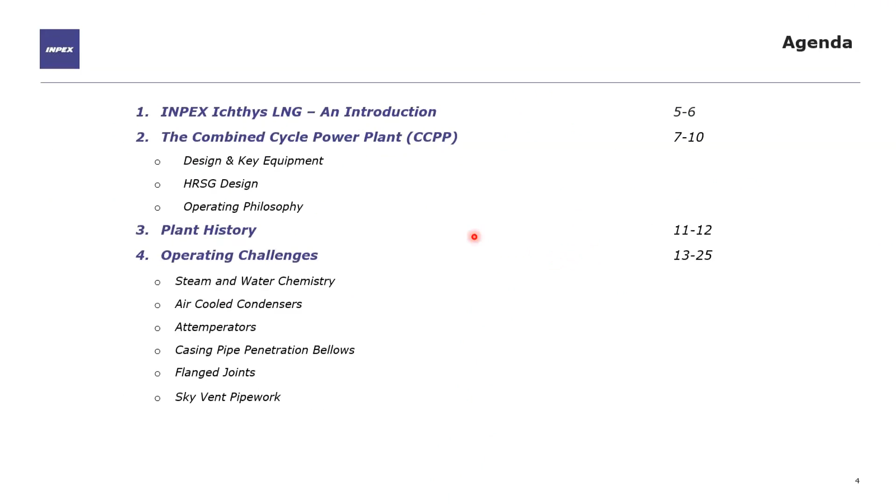Okay, so today we'll just introduce the Ichthys project to the AHUG audience, looking at the onshore combined cycle power plant, or CCPP. We'll go through its design and key equipment, the HRSG design, operating philosophy, some plant history, which neatly takes us into discussion of some of the challenges we have or are still facing today. In a nutshell, the Ichthys project is INPEX's first owner-operated project with a whole bunch of subsea infrastructure — two massive offshore facilities and an 890-kilometer subsea pipeline to the LNG plant near Darwin.

This is an aerial photo of what most of the onshore LNG plant looks like. It is what's called a 2-train LNG facility, so 2 processing units that take feed gas and turn it into products.

Headline numbers, it can produce a lot of LNG, a lot of LPG, and a heavier hydrocarbon liquid called condensate. Despite all the challenges we've had since FID was reached in 2012, since starting up production, we have

been producing cargoes at a rate that puts us in the upper echelon of similarly sized plants globally. The power station shown in this yellow box is one of many key utilities on the plant. Within Australia, this LNG plant is the only one I know of that has a combined cycle power plant rather than a bank of just gas turbines. From a design point of view, that was probably to achieve more energy and emissions efficient power production. And originally there was an intent to use excess isopentane coming in from offshore.

This gives you a bird's eye view of some of the key equipment. So there are 5 40-megawatt gas turbines, each with an HRSG, a set of common piping headers of steam, condensate, and water, which I'm told is a very rare design these days, but there are reasons why we have this setup, which we'll get to shortly.

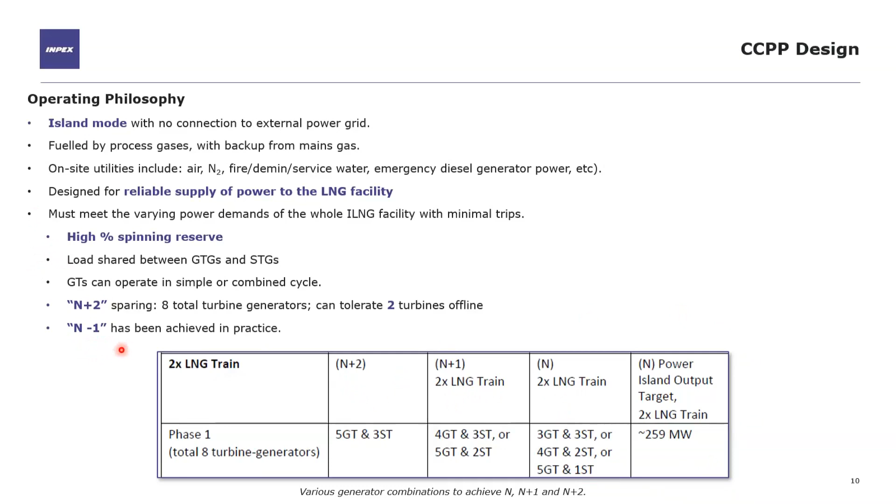Going into some plant history, without going into too much sordid detail, there were some very well publicized contractual issues during construction. This shows up to a degree in the gaps between the first and the last gas turbines to be started up, and the gap between the last gas turbine and the first steam generators.

If you're very eagle-eyed, you might notice that the date of the first HRSG startup is almost a year after we started producing our first few LNG cargoes. But anyway, they're all online now and they've been operating for about 2.5 years.

Prior to getting to this point, the operations team that I'm in did, well before commissioning, an RBI assessment across all facilities, including the power plant.

One of the RBI team members was a very good power plant chemist who did a pre-commissioning review of our steam chemistry, looking at the analyzers, listing out all the things we should be doing. That work fed into a very EPRI-centric chemical treatment guideline, which was reviewed by everyone and issued for use. Then, prior to introducing steam to our turbines, we had an independent site chemist come to our site, give his opinion and make some very important recommendations.

To this day, we are still refining our RBI programs using expert help, as well as live data from parts of the plant to understand how our plant runs. There is significant effort in trying to improve reliability of the plant, so there's a formal reliability improvement program in place across different disciplines and themes.

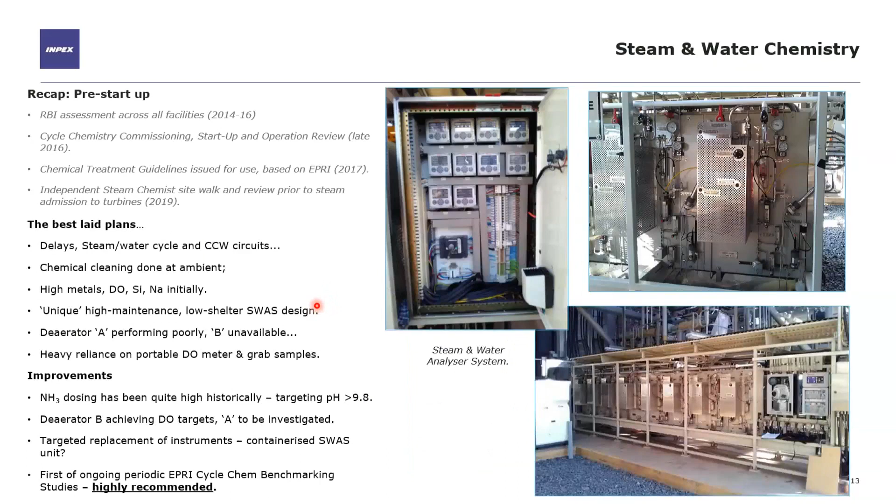A decision we're grappling with now is to replace our low shelter, high maintenance SWAS with a proper SWAS containerized unit. And from what I'm hearing, that's very much a go. It'll just take some time.

We've recently had the first of what will hopefully be a periodic EPRI cycle chemistry benchmarking study. If your plant isn't doing this already, I highly recommend it. In our first attempt, we scored an average ranking of 18, which isn't too bad, but we know we need to do better. We know what we need to do better, and it starts with the SWAS. We've been given a fairly clear roadmap. We just need to do it.

On the inspection side, fortunately, from what we've seen so far on the HRSG, we haven't seen any direct evidence, either through UT or visual, of FAC on any components yet. But on the solar air-cooled condenser we have looked at, we are definitely seeing indications of, well, if it's FAC or erosion, one of the two. Penetrations are looking great, and offline there's a lot of residual water left behind and a lot of flash rusting.

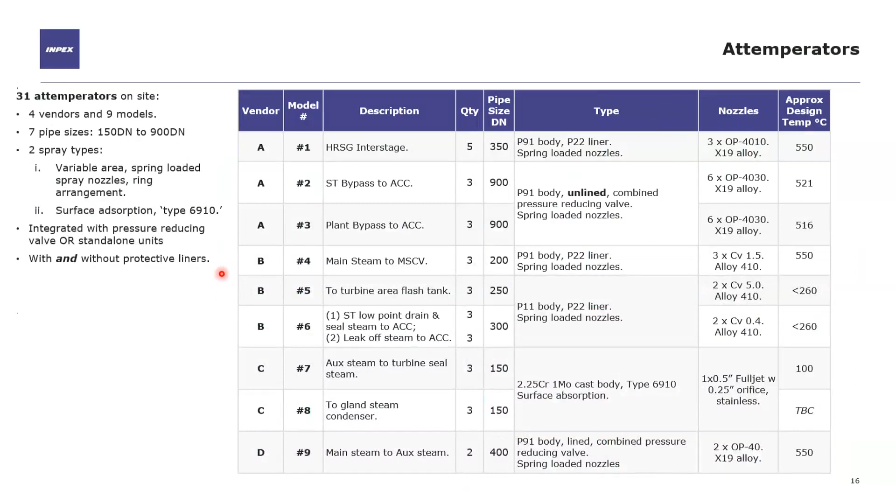Turning now to our attemperators, I won't read this table out, but what I will say is that we have a lot of attemperators on our site, 31 units all up, across 4 different vendors, 9 different models. The pipe sizes range from 6-inch to 36-inch. They are primarily the spring-loaded variable area type, but we have a half dozen of these surface absorption desuperheaters, which I'm not sure are commonly used in the power sector, so I'd appreciate some comment on that and on the sheer number of different types and makes and models we have.

Many of them are standalone, but many are integrated with pressure reducing valves. Many are lined, but a good half dozen are not lined. The spec sheet clearly says a liner is not required, though if you look at the design conditions, it's questionable as to the logic they may have used.

This shows schematically where all the attemperators are. You can see that single interstage attemperator on the HRSGs, but by and far, the vast majority are concentrated in the steam turbine and ACC area.

We've been confronted by finding at least one cracked attemperator nozzle in all 5 of our HRSGs during their first inspections, which was around 15 to 18 months from startup. I know there's a lot of work that goes into attemperators, but is this normal? Should we expect a minimum of 2 years from a good attemperator, or 4 years, or perhaps more?

Typically, the external cracking shows up through mag particle as cracking through-wall at the flats. Though once or twice we occasionally see these heavily scaled and dirty-looking nozzles, and if you look on the inside of it, you have this metallic gray appearance, which to us is very indicative that this hasn't been flowing water, compared with the vast majority of nozzles which have that classic AVT-O red color. When we first asked the vendor about it, to them this was a novel failure mechanism that they'd never seen before, though fortunately we hadn't seen any pipe or liner damage as of yet.

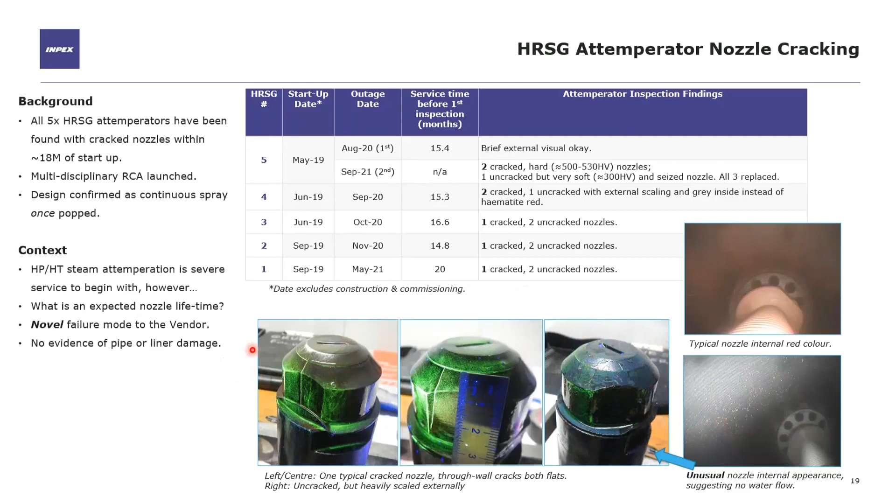Internally, this is what many of the cracked nozzles look like. It appears that cracking has started at one or more of the ligaments. The stresses have then allowed a crack to initiate and propagate in the next ligament, and before you know it, you're at the wall and making your way through the wall.

We've now had 2 different metallurgists section and mount cracked nozzles, and they both agree that the cracking morphology takes the form of stress corrosion cracking rather than, say, a fatigue mechanism. There's a lot more to an attemperator than just metallurgy, and we're working on the process side as well, but our findings we thought were pretty compelling.

So the vendor has specified an 11% chromium martensitic steel, in some ways not too dissimilar from P91, with a surface hardening treatment to improve the galling wear resistance. And they targeted a 45 to 48 Rockwell C range, which is about 450 to 480 Vickers.

That might have been reasonable for those 2 characteristics. However, it is quite well known among metallurgists and in some fairly important books that these sorts of materials, at these sorts of hardnesses, are acutely susceptible to stress corrosion cracking, and theoretically in moist air.

We've gone hardness tested on the bench and portable hardness tested, probably 15 nozzles now, some brand new, some cracked, some used but not cracked. Many of them are out of spec, up to 600 Vickers, with many above 500 Vickers. There was that one very soft nozzle, that's a special case.

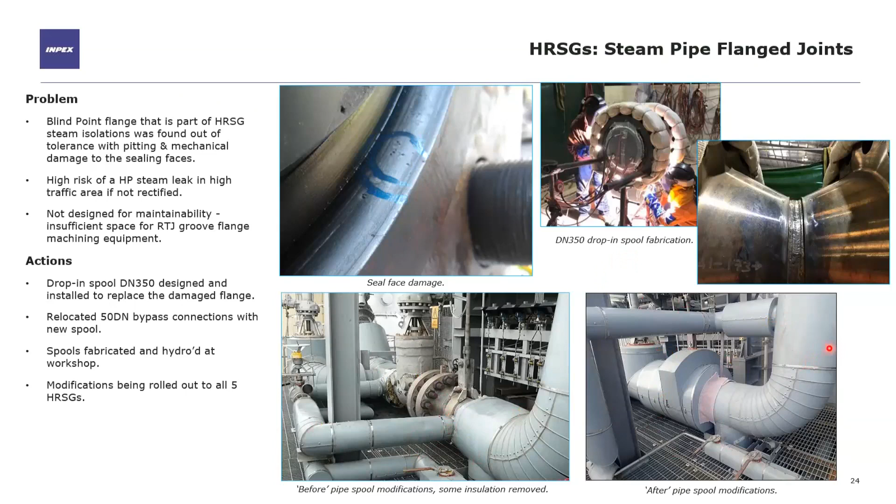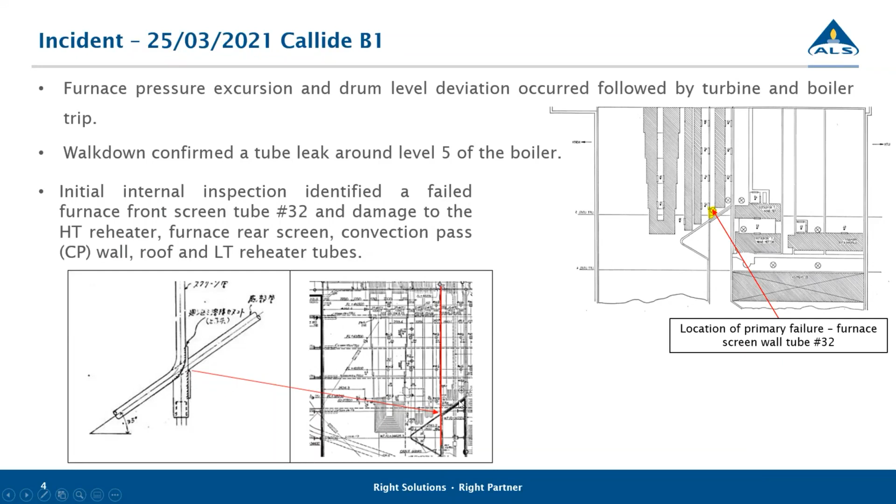So just a history of similar incidents. A complete tube failure at the gusset connection occurred on B1 in 2015. If you look at the failure this year, again we had a tube failure on B1 that had a complete failure, so the complete rupture of the tube. And also on B1 in 2020, we had a crack with a leak before rupture.

So I'm first going to talk about just the metallurgical analysis that was done. The tests performed were the typical process we normally follow: visual examination, hardness testing, fractography examination looking at the fracture surfaces, chemical analysis, and metallographic analysis.

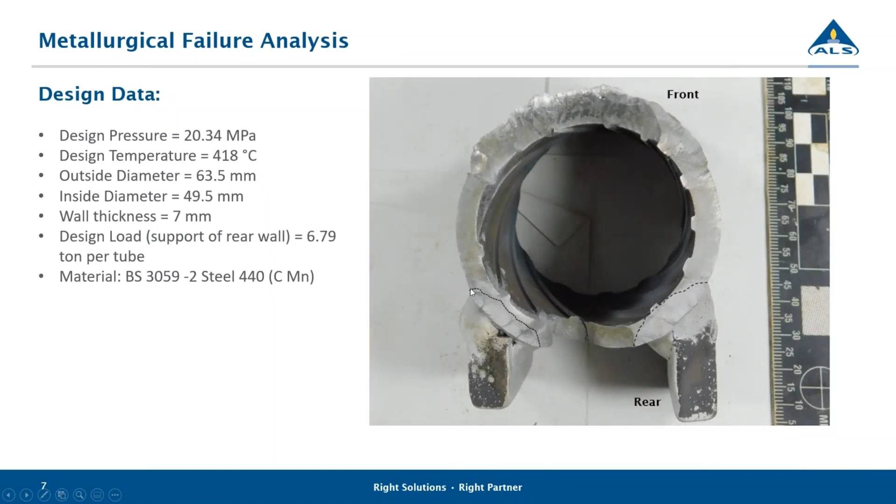You can see here is the failed surface of the tube, just above the two brackets. You'll see this is the first area which cracked from the toe of that bracket into the tube, nearly through wall, and then we also had the other side which didn't grow so deep, but before it leaked, the rest of the section failed, and it's quite a large section that has failed.

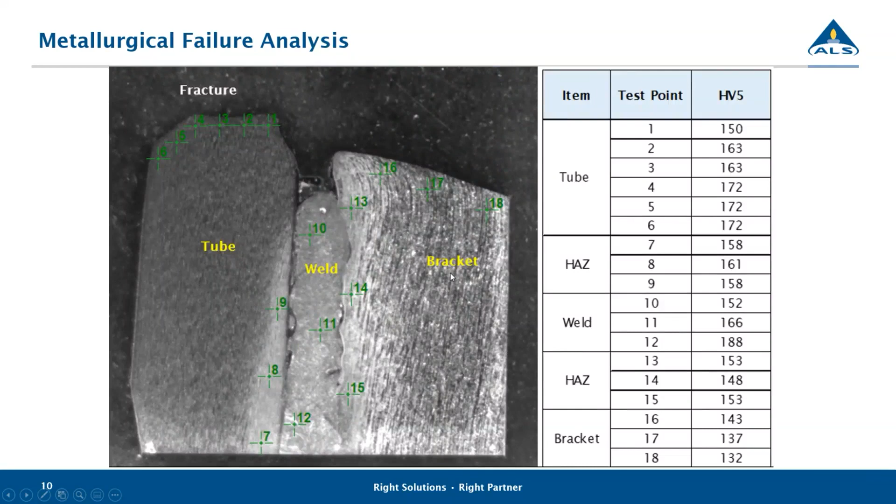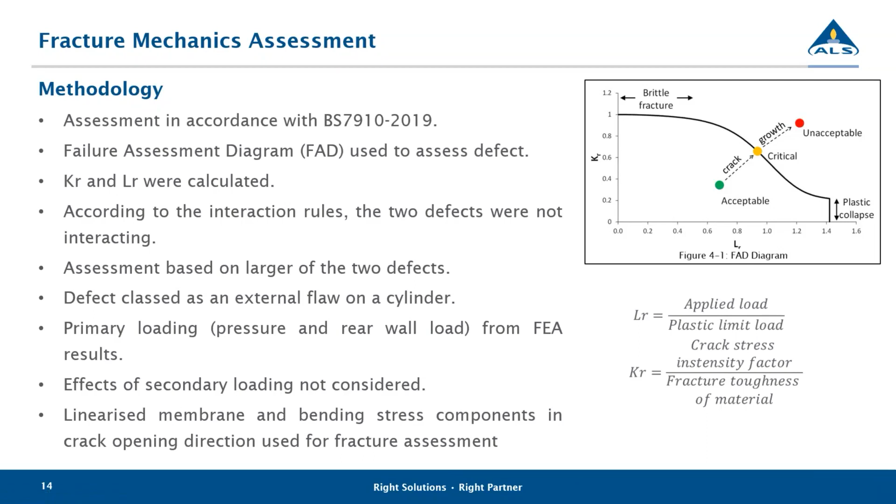So just the conclusion from the fracture mechanics assessment is that the loading with the defects present is sufficient to cause plastic collapse. If you look at the toughness ratio versus the plastic collapse ratio, allowable versus actual, you'll see that we've got a plastic collapse ratio of 1.32, which tells us that for the defect we've assessed, plastic collapse is plausible. So that gave us confidence that there's not something else that caused an overload, but that with the defects there, and because the tube is highly loaded, those defects could be sufficient to rupture that tube completely.

We also had a look at vortex shedding frequency. So we looked at the length of that sling tube versus the design gas flow across that tube and calculated the vortex shedding frequency. It's around 30 hertz for a Strouhal number of 0.2. Obviously there is a range there, so we did calculate a range, but for 0.2 it's 30 hertz. Then CS Energy also, during outages, tests their tubes for natural frequency to check if the tubes are actually carrying load. They put an accelerometer on there and then do a bump test to see what the frequency is. The fundamental frequencies they've measured on site are between 32 and 41 hertz. So we can see that it's pretty close.

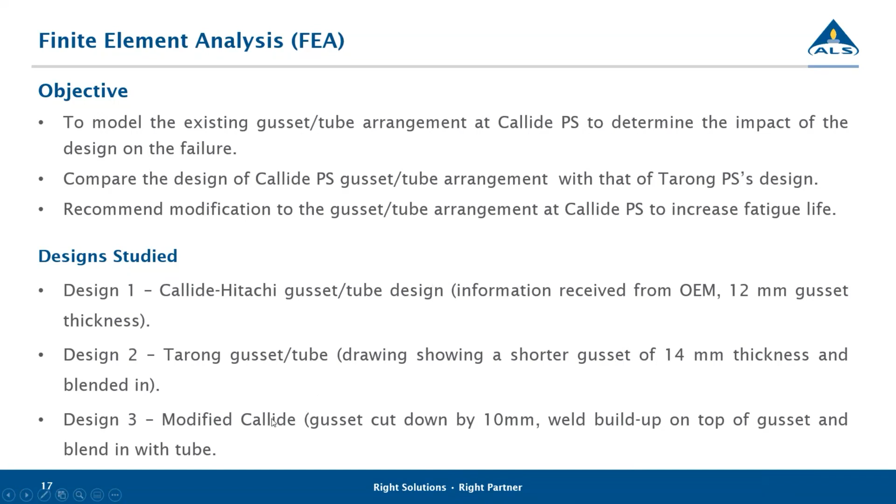So there's 3 designs that we looked at. The original design, which is a 12mm gusset with just welds on the side, no weld on the top. Then we looked at Tarong - it had a shorter gusset with a 14mm thickness, and it was blended in. And then we looked at a modified design to see what we can do with the existing geometry on site, to see if we can improve that situation.

Tarong design is slightly different, which is strange - it's an older boiler, so you would have expected the design would be improved from Tarong to Callide, but in Tarong's case, the bracket stopped almost on the bend, and at the top of the bracket they actually filled in that little abrupt change, to blend that weld in. I've been on site looking at that specific geometry, and it looks pretty blended in there - you almost can't see a notch. So that's a big difference in the finish.

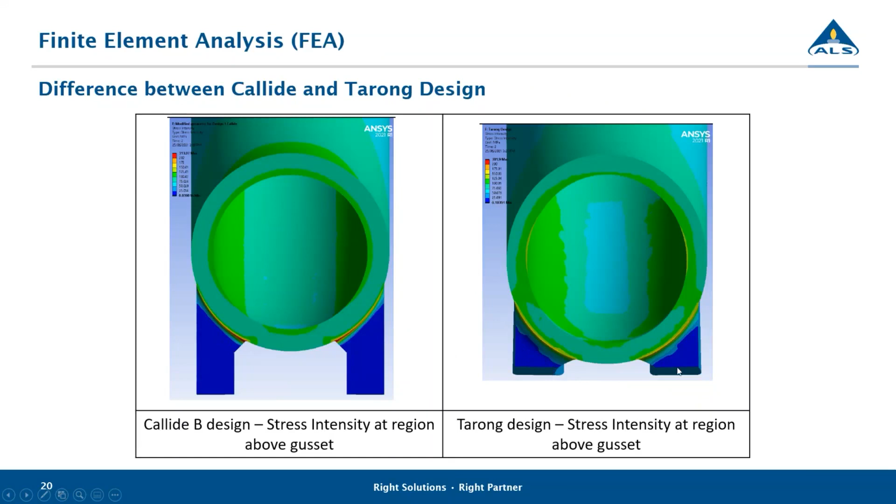If you look at the stress results, we got the same response where you saw that fatigue crack develop and moving in - we got that same response just above the toe above the bracket, not on the bracket, but just above it, and similarly for the Tarong side as well. So you can see the difference in thickness, as well as the difference in stress response.

But the big difference was in the peak stresses - quite significantly different because that weld is blended in, and this one has got that abrupt stop. So we basically cut back that bracket and put a weld on top of it and blended it out to drop the peak stress. That's pretty much what we could do with the geometry on the plant.

So from the FEA side, the stress is close to the maximum allowable, even for a defect-free structure. That means when they designed the screen tube, just from a pressure perspective even - we did the code calcs as well - they had that very, very highly loaded. So that's not even considering the bracket geometry.

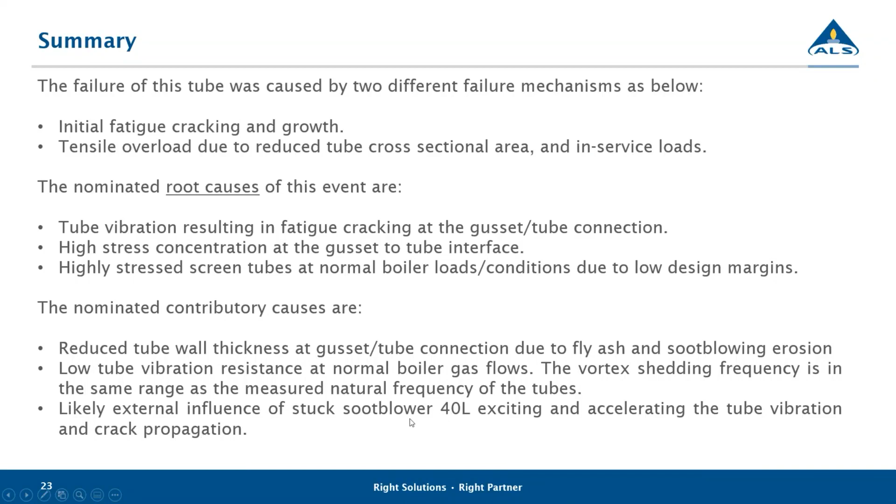So that's in summary. It's an interesting one. If there's any questions, please feel free to ask.

Jerry, very nice. Barry, we've got a few minutes for questions. Yeah, there's one here from Gree. I'll read it out, it's just a short one.

Jerry, he says he might have missed it, but what were the materials for the gusset and the tube made of, please? It was steel 440, so it's a carbon manganese steel, just normal water wall material.

That's it. Well, yeah, okay. And I don't see another one. Let's see if there's another one here. No, the other ones are for Ben, so we'll have a question.

So Jerry, there wasn't any detailed metallography, but maybe you can tell us. It would be a little surprising if there wasn't any cracking from the inside with such levels of stress, or something like corrosion fatigue. I couldn't see anything.

No, all of the cracking propagated externally, from the toe of the welds. All of the secondary cracking — that whole area above that weld was full of secondary micro cracks. So it was basically fatigue at that peak stress location. The rest, there was no evidence of any cracking from the inside.

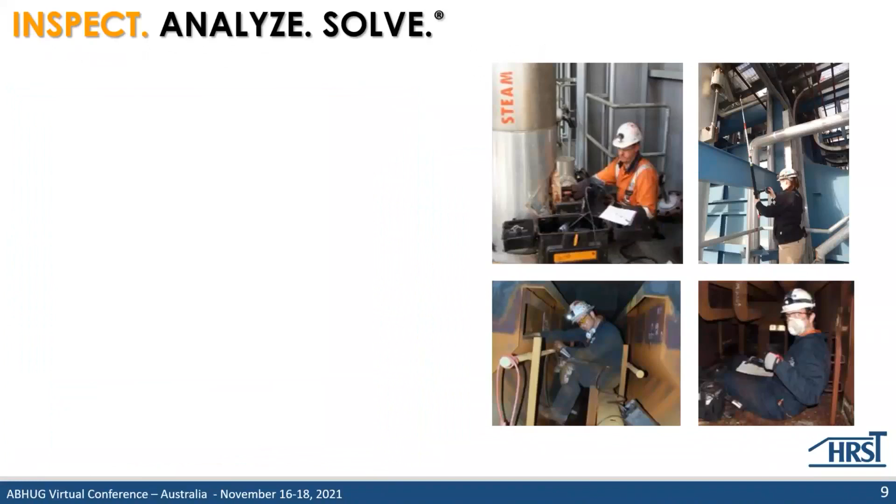So back to what we do. We do a lot of inspect, analyze, and solve. We're in over 280 HRSGs a year, so we see a lot of things that work and a lot of things that don't work. We try to provide good recommendations to clients and share those lessons learned. From that, we use photographs, drawings, dimensions, and failure history, along with knowledge of what worked at other plants, to help make recommendations and improvements. I need to give credit to ALS for this image in the bottom right-hand corner. They help us a lot with drum cracking analysis work, so we partner on that a lot. That image is from one of their reports to our client.

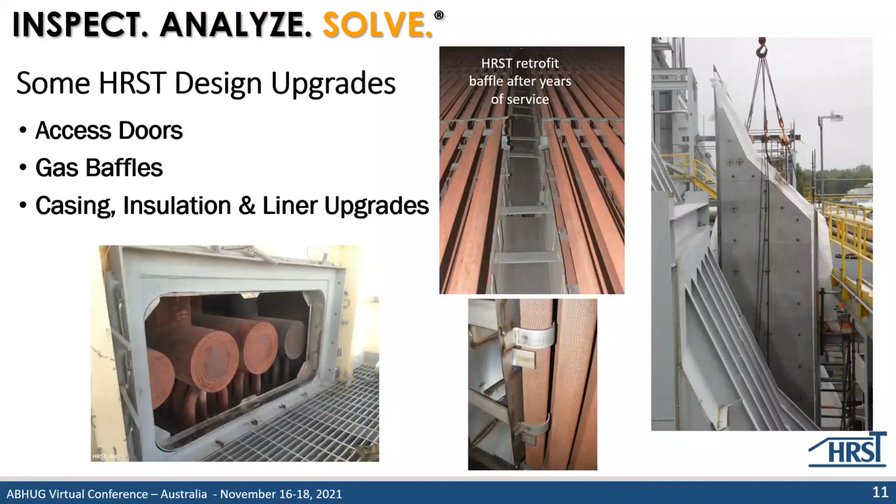We do a lot of solutions that involve hardware. We sell a lot of access doors. Sometimes those doors are not to enter, just to reach through to look at fragile areas like tube-to-header joints on reheaters or HP superheaters. We've sold some doors in Australia just to get tube samples from the HP evaporator out, because the row of tubes we want to sample is not accessible due to a superheater right in front of it. We also do a lot of gas baffle work, and sometimes we replace the entire walls of inlet ducts, or all the liners and insulation in an inlet duct or firing duct. Those are great projects for us.

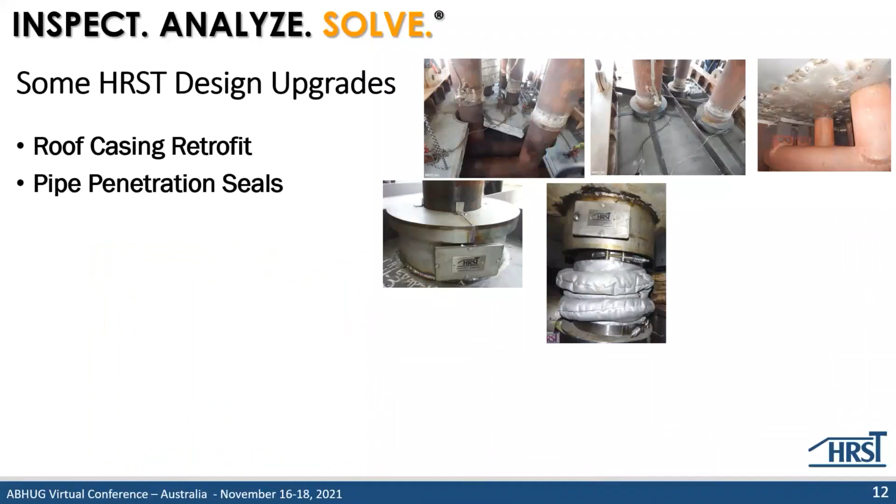One more slide after this. We do a lot of roof casing retrofits. As these HRSGs get older, Module 1 and Module 2 roof casings deteriorate due to weather, heat, and failing pipe penetration seals. Those are pretty complicated projects - we call them puzzle pieces that we come in with to try to retrofit effectively. We do a lot of pipe penetration seal work, removing the old seal and putting on something better that's hopefully more durable. Lately we're doing a lot of drum door manway upgrades, making them safer and more reliable using Belleville washers and different hardware that's easier to open and close, because we know how important a good seal is on a steam drum and how leaking during startup can cause problems.

Thank you, Lester. Lester, being in Florida, trying to surf in Florida is like trying to alpine ski in Kansas, so you might have been in the wrong place - it might not be you, it might be the location. No, I can't handle anything except Florida, I need those tiny waves, I'm too old and too fragile. I was stiff, stiff bad here yesterday. Did that on Sunday. Oh good. Well, thank you, thank you much.

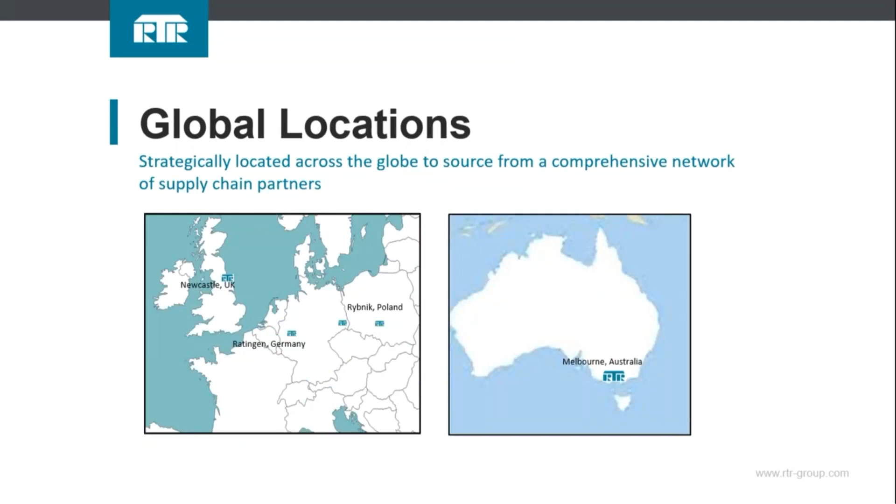Our global locations here, you can see there - Ratingen in Germany is our head office. I represent the Newcastle office in the UK. There's an office in Poland, a strategic office in Rybnik. Obviously, the Melbourne office here in Australia is where I'm located. We're strategically located across Europe to source from a comprehensive supply chain, some of which our suppliers we've been working with for more than 20 years - forge masters, pipe mills, stockists, fabricators, everything.

The product range is very varied for the various applications in power gen. We offer main steam, hot reheat, IP, HP, loop pipe work in CMV, 2.25% chrome, 9% chrome with GT26 turbines and CCGTs. That's pipe work for partial refits to wholesale steam line replacements.

We also offer the associated pressure fittings and elbows and pipe hangers and supports for these contracts. Fully fabricated water wall, induction bending as a major part of that and what we do as well. And as we're developing, we're doing an awful lot more work in explosive, roll bonded, weld overlay clad products. All of this is supplied in accordance with bespoke and technical requirements in accordance with clients' needs.

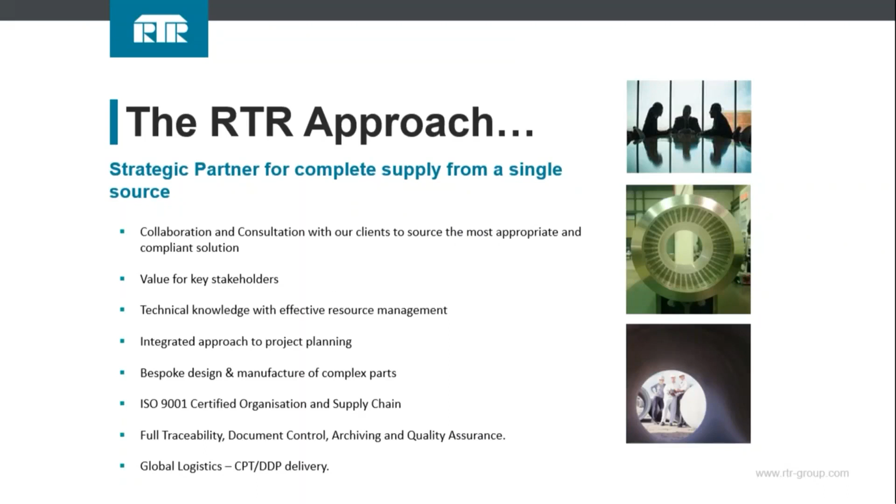The benefits in terms of optimum longevity, the reduction of welding, not to mention the fact that you're saving time on installation as well, and the reduction of continued observation of welds that no longer exist. The initial upfront cost for a forging can be higher, but the long-term cost of running as part of the plant life can be a significant saving.

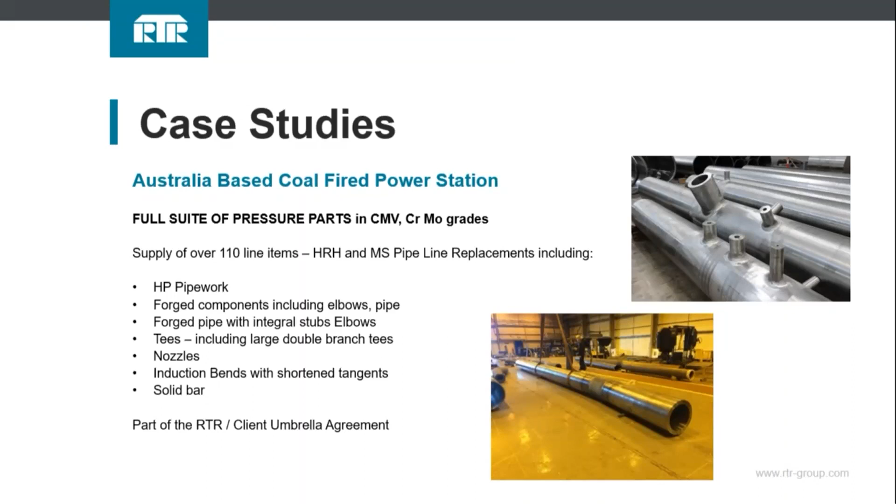This is one of the largest forgings that we've produced in our company. You can see this double branched 5-ton reheater strainer body, the machining involved to produce the finished part, produced with an integral reducer, eliminating the weld setup that was previously in place. This is all manufactured to extremely tight tolerances, plus or minus half a mil to manage weight. There's also been thousands of dollars spent on the technology to machine the internal radii on products like this, smooth and completely contoured to eliminate those stress points of sharp edges that you see.

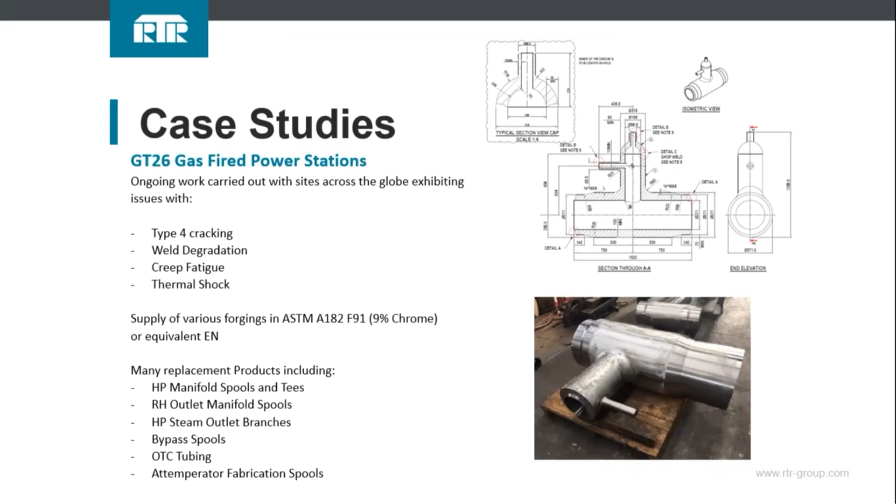As things develop, we're seeing an awful lot of work in GT26 turbines, particularly in the UK, where there's been a lot of issues with type 4 cracking, weld degradation, creep fatigue and thermal shock. So we've done an awful lot of work in 9% chrome, supplying, for example, this integral forged T for manifold spools, reheat outlet manifolds, done an awful lot of bypass work, OTC tubing and attemperator fabrications. We would encourage anyone with similar setups and the GT26s to come forward and have a chat with RTR, as we may have been producing products that meet your requirements.

Thank you. You had it, then it went away. Okay, can you hear me now? Yeah, we hear you, your full screen went away though. Yeah, I'll get it back here. Okay, just takes a minute. It's got a long way to go. Yeah, I guess so. Well, hello everybody, Kirk Buecher here from Mettler Toledo. Hopefully I'll be full screen here in just a second.

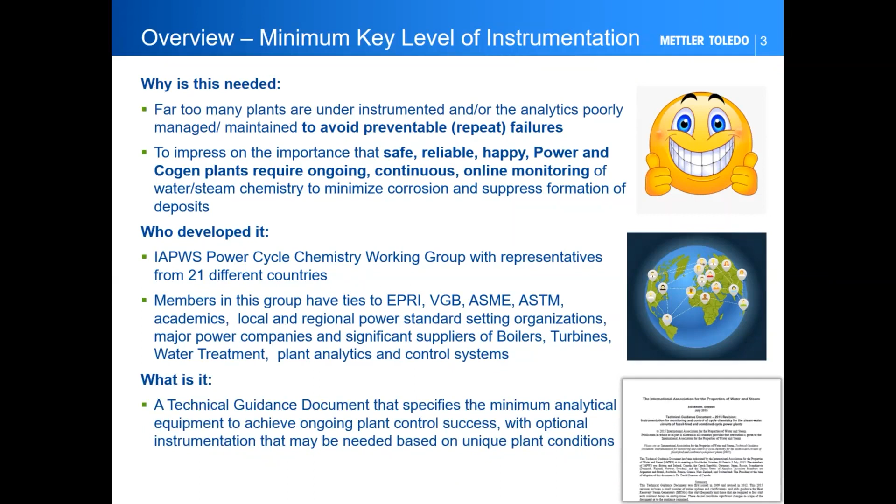That group developed and continues to develop and upgrade this technical guidance document that really lays out and specifies the minimum analytical equipment required for these happy, healthy plants. These standards, these documents, these recommendations were really developed with the following points in mind: you should have at least enough instrumentation that you can pinpoint the parameter, the driver for each failure mechanism that can occur in that plant. But you can't be just single threaded. There needs to be some redundancy there, and it needs to provide more sensitivity, more of a holistic view.

So one instrument should be able to represent a problem, a failure in the cycle if one goes down. If a unit goes down, or something's out of service, or needs to be calibrated, or an analyzer's out of reagents, there has to be enough redundancy built in that the operator isn't questioning the accuracy of the analytics itself. They've got to believe it's a water problem. So there's got to be enough redundancy so the first response isn't, oh, there must be a problem with that sensor, transmitter, or analyzer. We've got to get beyond that, and that's why we need the redundancy.

That also relates to this idea of trust. There's got to be trust in the results, the feedback from the analytics. This touches on concepts you've probably heard: smart analyzers, smart alarms, verified alarms. Those are talking points around the analytics and how they can raise the level of trust. And those analytics, especially these critical few, need to be correctly alarmed, audibly alarmed, and they need to trigger a response in the control room, through the DCS and PLC.

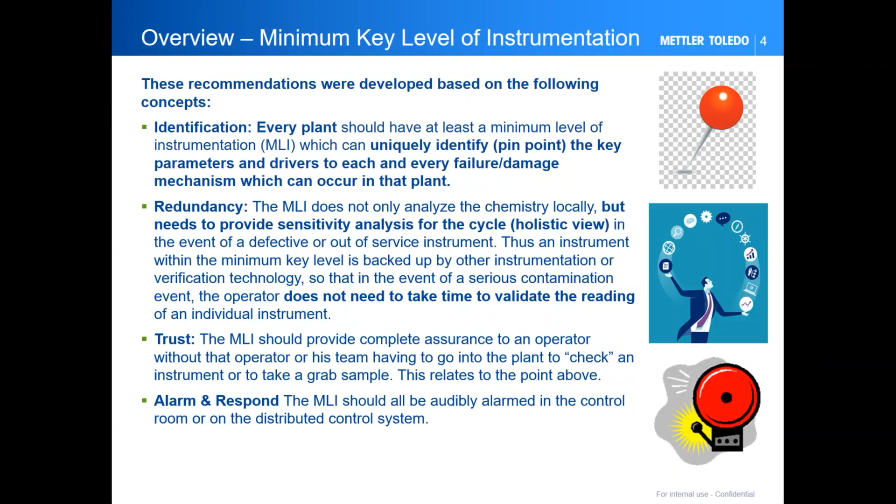I probably, pre-COVID, visited somewhere between 40 and 50 power plants a year all over the world, and I'm still surprised by how many sensors, transmitters, and analyzers are just standalone. They're not connected to anything. So if you're not standing next to the transmitter or analyzer when the alarm goes off, you could go hours before anybody caught the problem.

So, a quick overview of the key instruments. Again, these key instruments are defined by this document. Just a basic overview on specific or direct conductivity.

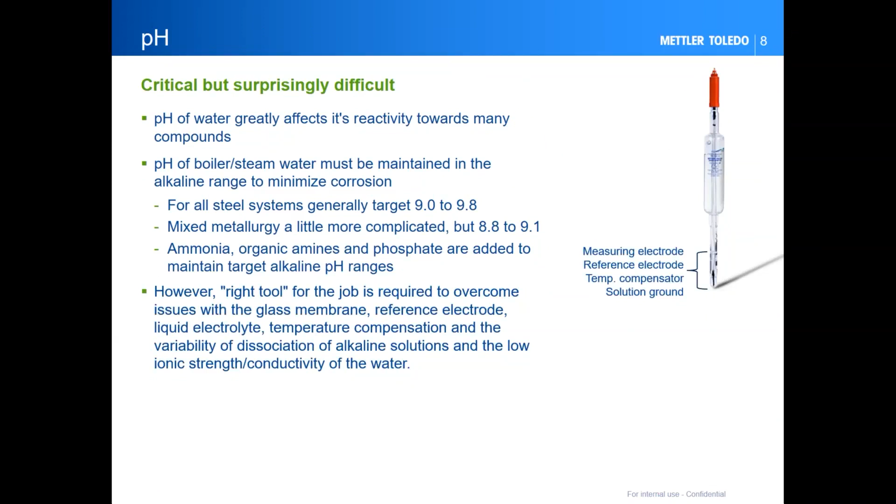pH, as most everyone who has dealt with it in pure water knows, is a critical measurement, but surprisingly difficult. Measuring pH in low conductivity, very pure water is really problematic. You have to use the right pH electrode for the job - it's got to be designed for pure water, low conductivity measurements. You should probably avoid any measurement system that relies on flow bowls, because unless you're really vigilant about keeping them clean, you pick up particulates and corrosion particles, which interfere with the accuracy of this very sensitive measurement. You've got to stay on top of calibration, and wherever possible, back up that measurement with calculated or derived pH. It's a critical measurement - much like the old saying, measure twice, cut once, it applies to pH. Measure pH with two different technologies simultaneously, and monitor the relationship between those two measurements.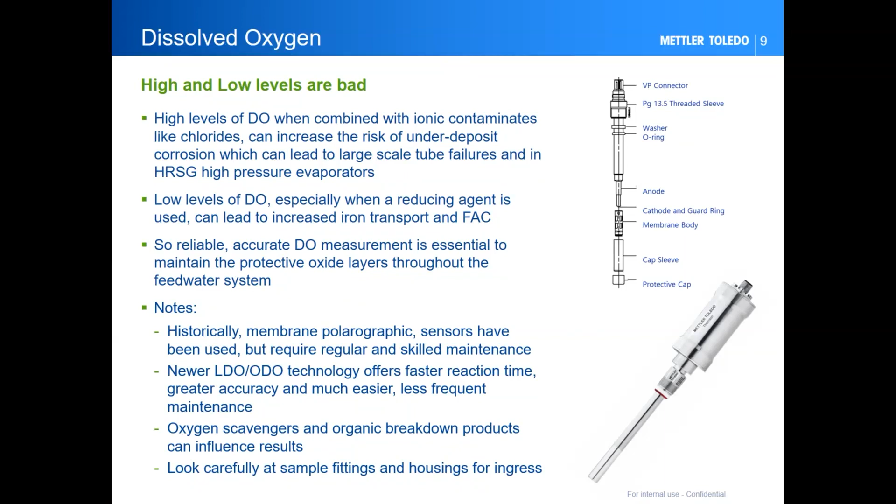Dissolved oxygen, as you probably all know, too high is bad, too low is bad. Especially low is risky when you're using a reducing agent. There is some new technology on the market, this optical-based technology - some vendors call it LDO, we call it ODO - that eliminates the traditional polarographic membrane, which reduces a lot of maintenance, reduces the frequency of calibration, and gives you a faster, more accurate measurement. It's really kind of the trend in the industry where a lot of people are going nowadays.

Sodium is a critical measurement, particularly for any plant that is seawater cooled or has a high level of sodium in their raw water. The fundamentals here are you're using DIPA to prevent interference with that measurement. You really would want to choose an analyzer that has automatic calibration as opposed to those with manual calibration.

When it comes to phosphate, still a lot of plants are using phosphate. The recommendation is it should be trisodium phosphate at a 3-to-1 molar ratio to really avoid potential damage being caused by the phosphate dosing, and to avoid chasing phosphate hideout problems of overdosing and underdosing and swinging back and forth.

Historically, some older analyzers really struggled. Online analyzers for phosphate honestly weren't that good. They weren't reliable, had high levels of reagent consumption, high maintenance requirements. A lot of plants tried them, got frustrated, and moved away from them. But I'd encourage you to take a look at some of the newer technology that's out there. It's really much better than it's been in the past, and it avoids the infrequent measurement that typically goes along with grab sampling.

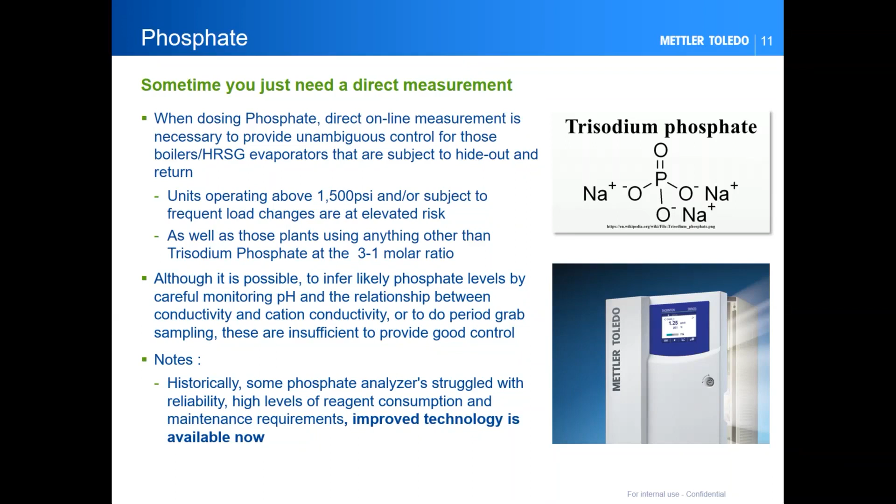ORP is an optional measurement, but really important. It's a key measurement if you have any copper alloys in your systems. There are standalone ORP sensors, and there are ORP sensors integrated with a pH electrode. Calibration is really important with ORP sensors, but unless you've gotten some training on it or built up some experience, a lot of people calibrate ORP sensors incorrectly.

The placement of that ORP sensor is really critical when you're measuring ORP relative to the scavenger measurement. Too early or too late relative to the scavenger dosing pump is going to give you incorrect readings. You've got to do the calculations to determine that your ORP sensor's in the correct location.

So that was a quick overview of the required analytics. Now some of the recommended or optional: degas cation conductivity. It really solves for that unknown of what is the contribution to your cation conductivity based on the CO2 that's in the water. That's a particular problem for fast start plants and for cycling plants. You absolutely can start your plant faster if you have degas cation conductivity because it eliminates that unknown. It gives you the confidence that you have the proper water quality and ultimately the proper steam quality to start up your plant and make sure your steam quality is in good shape.

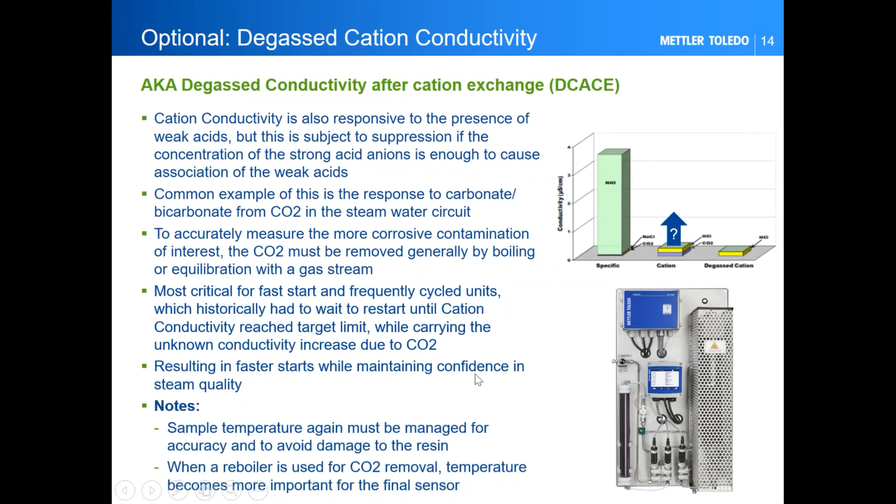The other optional measurements here are silica. Sometimes I'm really shocked that silica is optional — most plants use it, it's almost a default. It's considered optional because if your raw water has low silica level, and you have excellent and well-maintained water treatment system, you can get by with some periodic grab sampling. I personally wouldn't recommend it, but that's your choice.

Again, there have been some knocks against silica analyzers in the past because of reliability, high reagent consumption, or high operating and maintenance costs. There's really some new analytics on the market that eliminate that and could really move from optional to recommended if it's low maintenance and low cost to operate.

Total organic carbon is another recommended, optional, not required measurement. It's really critical for cogeneration plants, pulp and paper plants, refineries, chemical plants — wherever you have a real high risk of organic contamination coming back with the steam condensate. Highly recommended in those situations, and it can really prevent those organics from coming back and quickly wiping out the resins in your condensate polisher, or, without a condensate polisher, going into your boiler and breaking down into organic acids.

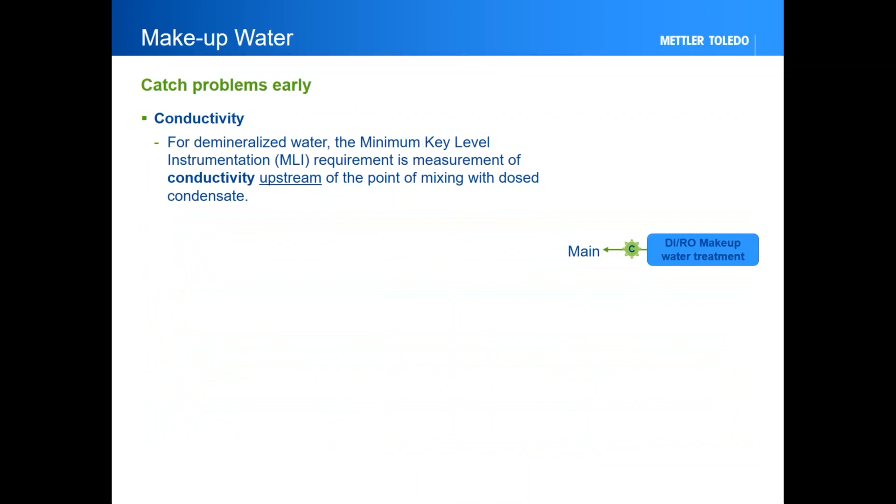So why are we measuring this? Where are we measuring it? We're going to go around the water treatment cycle, the boiler steam cycle, starting with conductivity. In the makeup water, you want to measure that as it comes out of your water treatment, upstream of where it mixes with your returning condensate. Then for cation conductivity, you want to measure that in the condensate stream, so you have good insight to the quality of the water coming into your boiler steam cycle, returning from your condensate. And if you have a problem, you know where that problem is sourced.

Again, some of the optional measurements here are silica and TOC. TOC is particularly important if your raw water comes from natural rivers, lakes, or streams that have a lot of organics in it — particularly a problem in Southeast Asia, places like India. They really struggle with building water treatment systems that can remove all those organics prior to it going into the rest of the cycle.

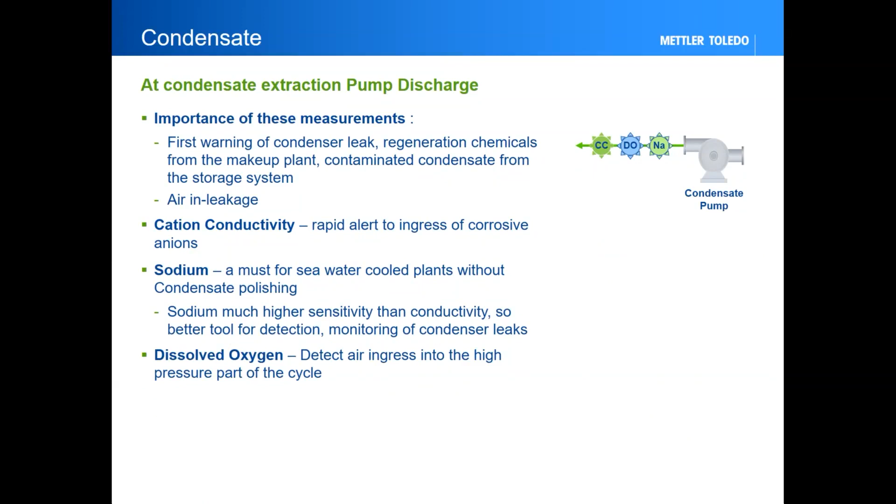On the condensate, you want to measure at the condensate extraction pump discharge. This is going to be the first warning point of a condenser leak, or whether you have some regeneration chemicals from the makeup water plant coming over. It'll tell you whether you've got contaminated condensate from your storage system, and gives an indication of whether you've got air in-leakage.

Here you want to measure cation conductivity, sodium, and dissolved oxygen. Then optional, but really helpful and part of this holistic view, is pH. And if it's a fast start plant, again, degassed cation conductivity. Now, if you have feed water with a condensate polisher, at the condensate polisher outlet you want to be measuring

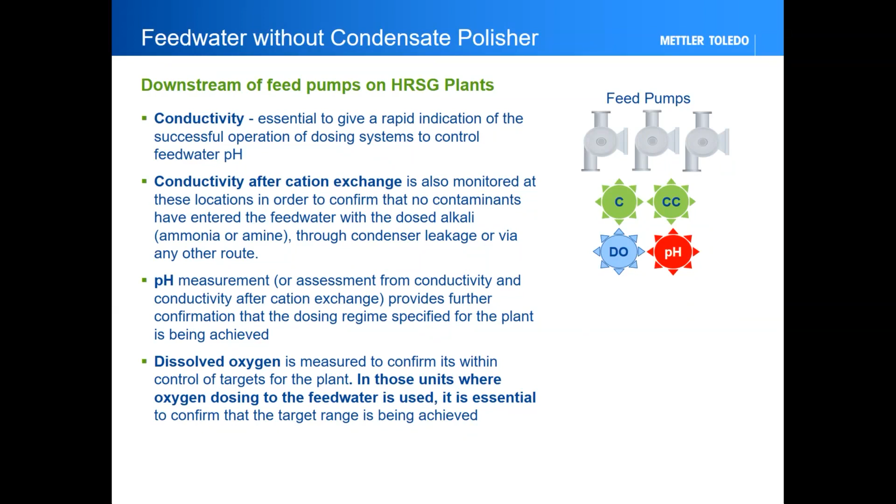I'll point out the comment on dissolved oxygen. Where you're dosing oxygen to the feed water, you really have got to verify you're maintaining the correct dosing of the oxygen. And then again, if you have copper alloys, this is where you would want to use your ORP or your combination pH/ORP sensor.

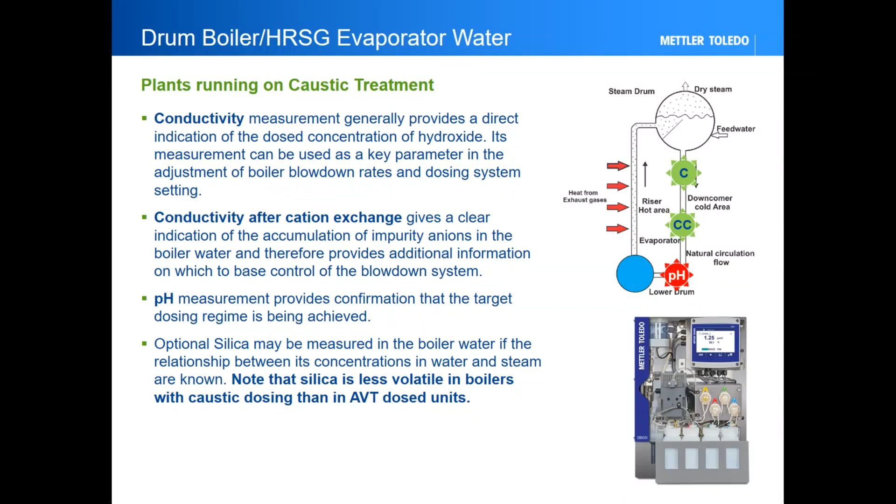If you're running drum boilers, you've got a drum boiler, HRSG evaporator, running caustic. Very similar: specific conductivity, cation conductivity, pH, and optional silica. Note that silica is less volatile in boilers with caustic dosing than AVT. So if you have a choice, where are you going to put your silica analyzer? Where is it needed more? It's going to be needed more on an AVT dosed unit.

Now, back to phosphate. If you're running phosphate, you don't need an analyzer, but it's a heck of a lot more convenient, because you're really trying to address a multi-dimensional problem by using conductivity, cation conductivity, pH. Based on dosing levels, at lower phosphate levels the pH is going to be driven more by ammonia. At higher phosphate levels, small condenser leaks might not even be noticed based on pH. So pH alone is not a very accurate or reliable tool in your toolbox.

Really, direct measurement of phosphate, either taking grab samples back to the lab or with an online analyzer, is a much better way to go to really avoid the headaches of phosphate hideout and return that little graphic is highlighting.

On plants running phosphate, to continue with this thought, again, direct measurement of phosphate, optional sodium, and optional silica.

Again, as these analyzers become more reliable, with less maintenance, less cost, less consumables, it really makes more and more sense to let the analyzers do the work instead of relying on grab sampling, which, as I'm sure you've heard Barry say multiple times, is not the way you want to run your plant. It's not the way you want to make serious decisions based on grab sampling and lab measurements. You really need to let the online analyzers do the work.

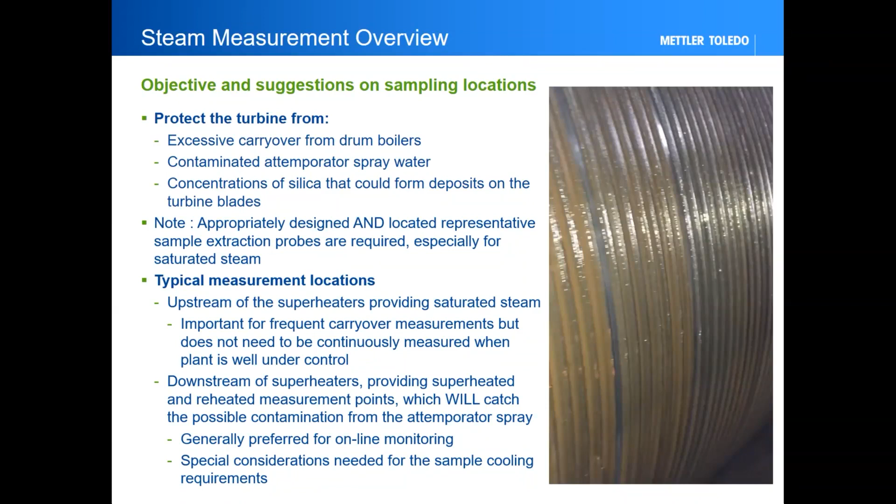With the lower cost of multi-stream silica analyzers, measure both. I'll show the consequences of not having minimum instrumentation, not measuring what you should be measuring, where it should be measured, and letting things get out of control. Eventually your steam turbine starts to look like this, and nobody wants that to happen. Analytics is a really good way to prevent that from happening to your steam turbine.

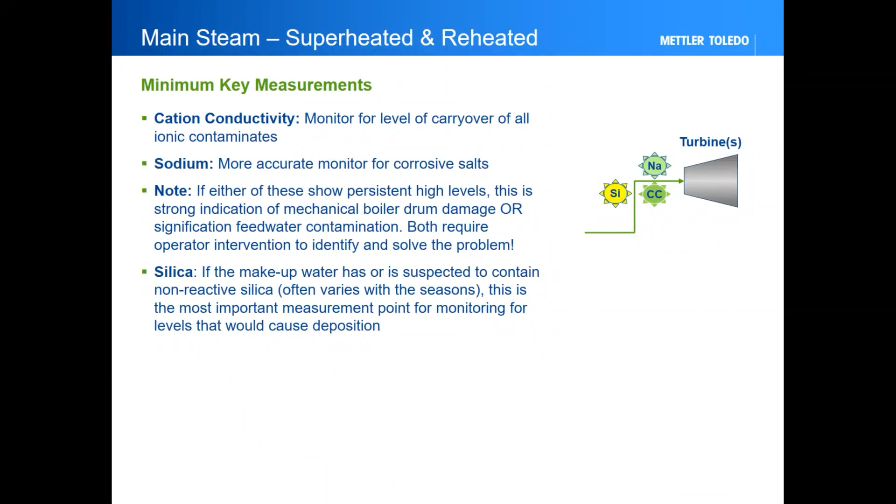So wrapping up, as we talk about superheated and reheated main steam, cation conductivity, sodium, and the measurement locations here - silica, again, if it has non-reactive or colloidal silica, that often varies with the season. The optional measurement is the degassed cation conductivity in your steam, again verifying that the steam quality is up to snuff. That's a quick overview of the minimum instrumentation required and recommended for happy, healthy, long life plants and avoiding these repeat chemistry alarms that Barry talked about yesterday.

If you haven't seen it, I'd highly recommend you go out to the IAPWS website. There is a technical guidance document on iron measurements. There's a lot of discussion, maybe a little controversy on different types of iron measurements, whether you're measuring total iron or particulate iron. Now there's a bit of a trend in the industry to use turbidity, and in some cases even particle counters and particle sizers as substitute measurements for total iron. IAPWS recommends that a true total iron test be made. We're looking at making some updates to those documents in terms of where and when to make measurements, but iron measurements are particularly key and very important for cycling plants and plants that are changing loads frequently. I think this is one area where we need more investment from vendors like our company to provide easier and more complete measurement solutions for total iron or substitute measurements.

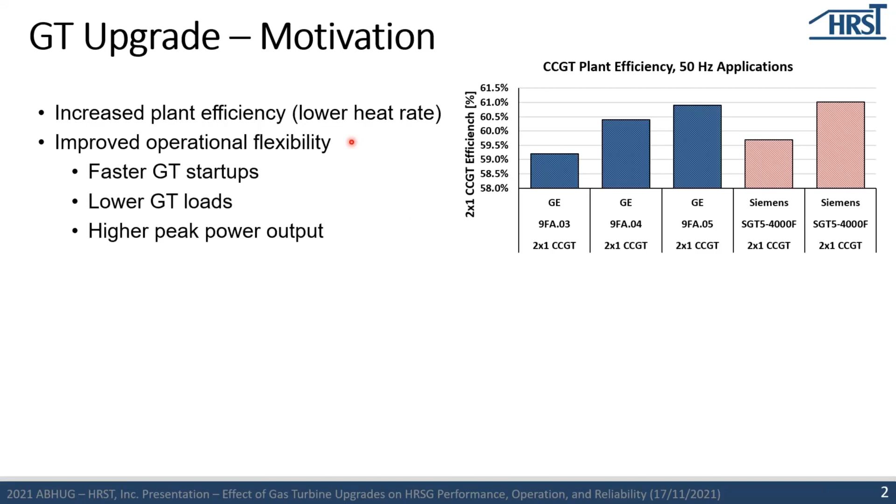Particularly in today's power industry, being able to respond to the grid faster is a huge factor for many combined cycle plants that are aging or potentially being built and need to have a higher motivator or a higher grid response. This could be to respond to the flux in renewable generation or the loss of megawatts from base loaded coal assets. And being talked about more and more frequently now is fuel flexibility and being able to be hydrogen ready, being able to blend 30%, 40, 50%, and ultimately 100% in the future.

So with a typical gas turbine upgrade, you're looking at changes to the exhaust gas flow rate, exhaust gas temperature, and the exhaust gas energy.

Overall, it's typically expected that you're going to receive somewhere between 3 and 10% increase on the gas turbine power output. The heat rate will decrease by somewhere between 0.5 and 1.5%. On the exhaust gas temperature side, you're looking at a plus 28 degree C at baseload temperatures. This can also increase the exhaust gas mass flow rate, roughly 2%. And you're going to experience higher exhaust gas temperatures during startup, and particularly at low load. Typically 649, 650 C is the maximum that is stated by the OEM, sometimes with a little bit of variation by roughly 1 to 2 degrees.

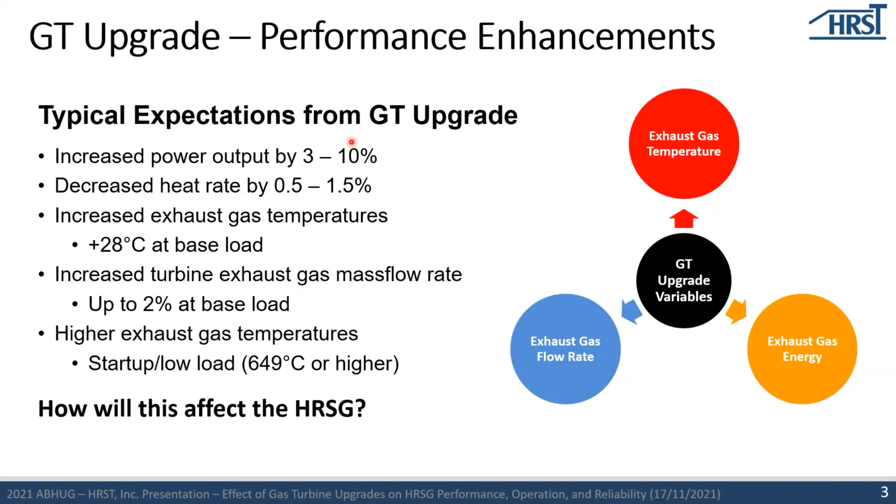So some of the key concerns all stem from those 3 items that I discussed on the previous slide: energy, mass flow rate, and temperature. Exhaust gas energy is going to increase the amount of steam flow, potentially exceeding the HRSG rated capacity. It could also reach safety and relief valve set points, as well as separator designs. The temperature specifically is going to become an issue for superheater and reheater tubes, non-pressure part overheat, attemperator operation, and emission compliance. And then the exhaust gas mass flow rate itself, which plays into the temperature and energy as well, can alter the performance of catalyst or gas side pressure effects throughout the HRSG.

Well, there's a lot of topics that we could discuss. I'm just going to highlight a few of the major ones today, which is tube metal temperature and overheat, attemperator overspray, rated capacity, and balance of plant considerations.

So the first one that I would like to discuss is tube metal temperatures. Base and low load are going to experience a significant increase in the turbine exhaust gas temperature, and you're going to experience this temperature increase earlier in the curve.

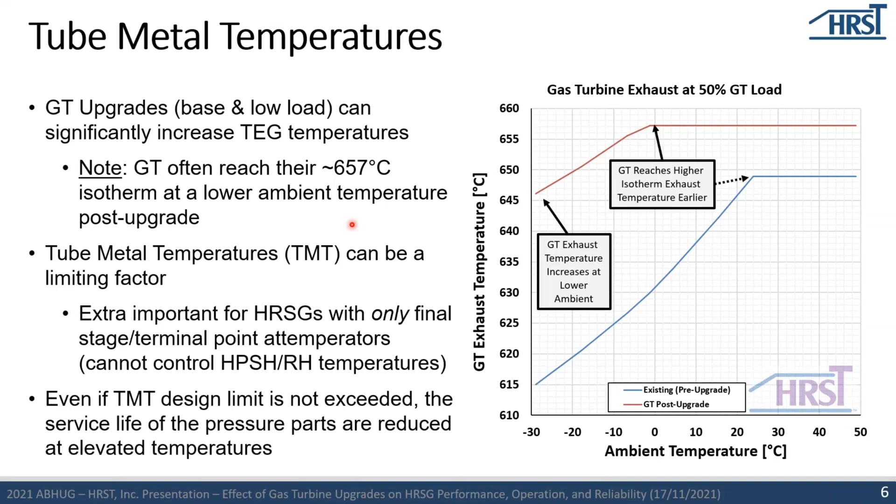And one thing to note as well is even if the tube metal temperature design limit is not exceeded, the service life of that pressure part could be affected just by operating at that elevated temperature and pressure.

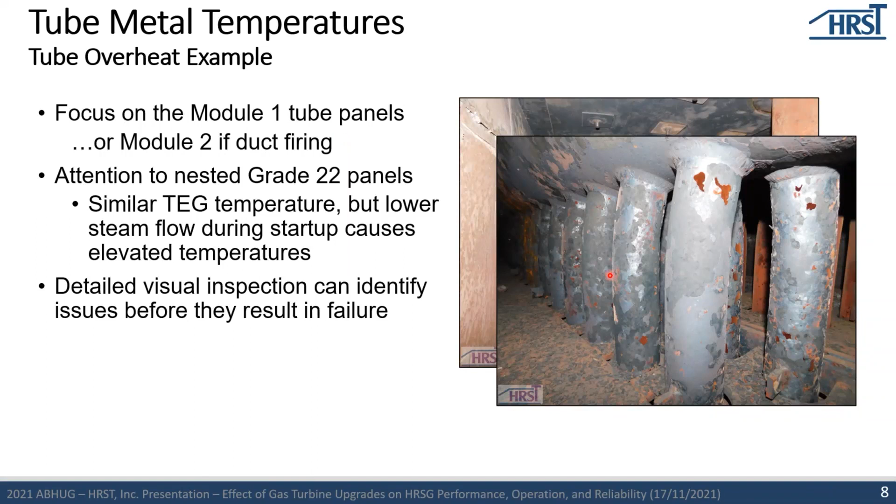So one of the best ways to look at this is just do a detailed visual inspection to identify if there's any issues that are occurring. You can see this exfoliation that comes about on these grade 22 tube stubs. This would be the steam outlet where you would expect the highest operating temperatures to be. And just to look at some more aggravated versions of the scaling.

So if you do find notable scaling and issues like this, a remaining life assessment can be used to help determine what the used up lifespan was and what the available service life is as you move forward.

So just a couple of ways to address tube metal temperature overheat. We discussed a few already. Periodic visual inspection of the tubes, external visual inspection, and internal borescope inspection, looking for any signs of oxide growth on the interior of the tubes.

Thermocouples mounted to the tubes is a great way to monitor them. Typically, you need quite a few in the HRSG spanning the entire width because oftentimes a thermocouple will tend to fail. So being able to have that redundancy can give you that confidence that you're operating at the correct temperature.

If there are indications of overheat that have occurred, there are some NDE field testing methods that can be done. Magnetic particle testing, looking for any signs of overheat and cracking that could occur, and then as well as ultrasonic testing and some advanced NDE shear wave phased array.

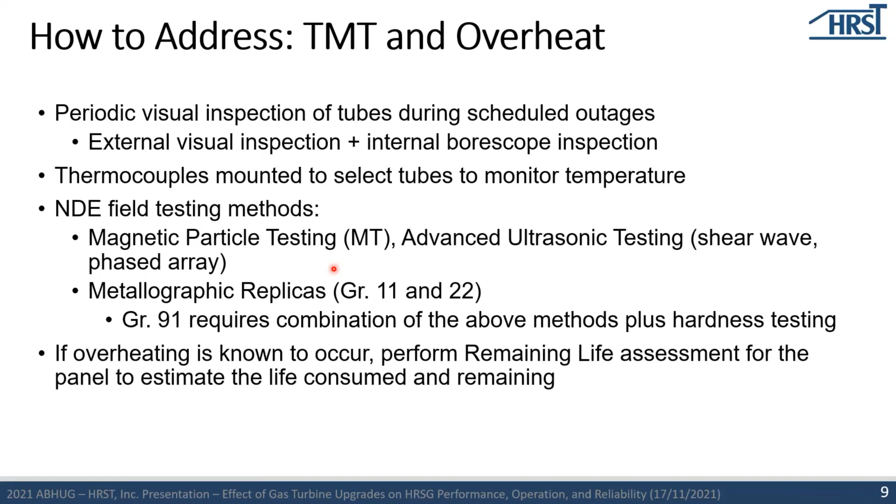And in some cases, particularly for grade 11, 22, and grade 91, metallographic replicas can help determine if there is creep damage or an onset of creep within that material. And like we discussed, if there is overheating, performing a remaining life assessment can help determine how much life has been consumed, how much remains.

And if you do have an HRSG where there's only a final stage or terminal point attemperator, you may need to attemperate the exhaust gas going into the HRSG, or consider retrofitting an interstage attemperator within the HRSG so you can accurately control those HP superheater and reheat panels to their design temperature.

Next, I'll touch on attemperator overspray and valve capacities. So one thing that we oftentimes see is in the post-upgrade conditions, even though the exhaust gas temperature and energy is going to be much higher, the final steam temperature set point is typically still around 565 Celsius.

And the reason for that is the steam turbine is only designed for so much. So we're always trying to hit that temperature, but we're going to have to throttle somewhere because the gas turbine energy is higher. So as the exhaust gas temperature and mass flow rate increases into the module 1 tubes, the typical trend is that as your exhaust gas temperature increases, your spray water flow rate is also going to increase.

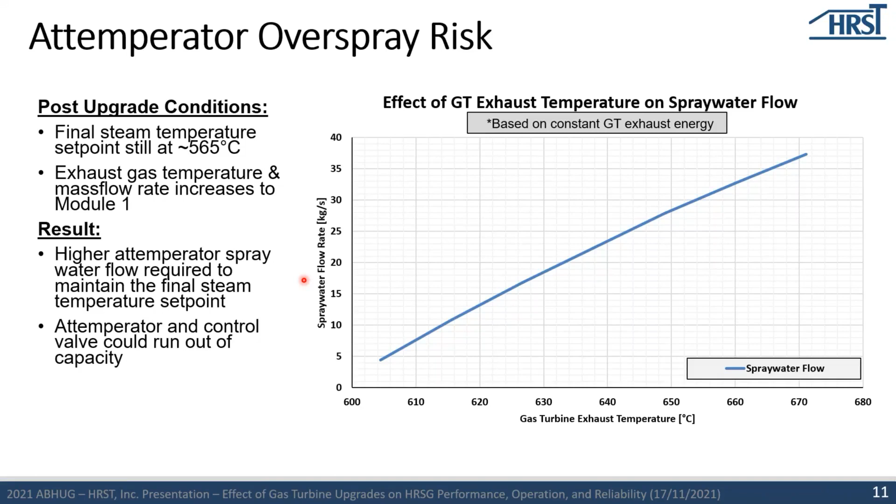And while this may not be an inherent issue, one item that you need to look at is that the attemperator or the control valve or even the piping associated with the attemperator spray water line, it could run out of capacity. So that's something that should always be evaluated prior to an upgrade, so you're not limited just due to the attemperator spray flow rate.

And next we'll look at one site-specific example. So this was an advanced gas path upgrade where the GE 7FAs were upgraded from the .03 to the .04 gas turbine package. These are Vogt triple pressure HRSGs in a 3x1 combined cycle configuration.

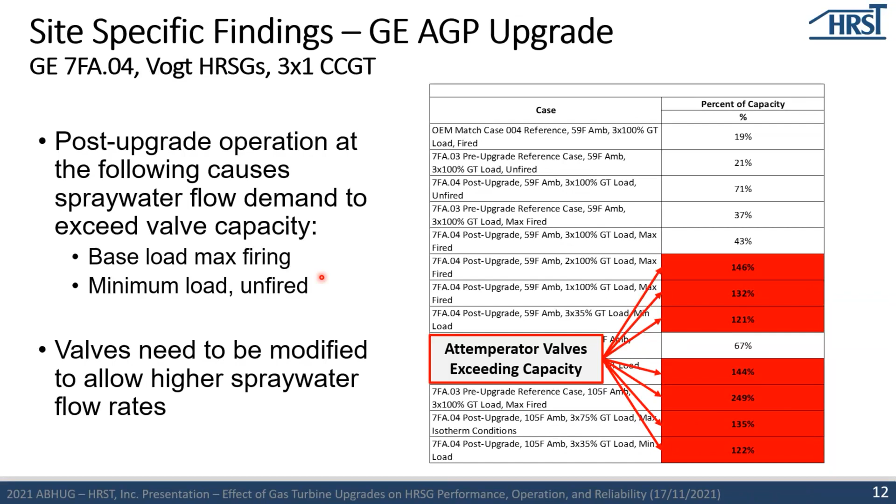So you can see in the post-upgrade operation, particularly looking at 100% load and even at low load, that the attemperator valves are exceeding capacity in a majority of the cases. These extend from typical ambient conditions all the way to warm ambient conditions, through all different facets of operation: base load, max firing, minimum load, and unfired. So for this particular plant, they needed to modify all of the attemperator spray water valves in order to provide adequate flow rates for these upgrade cases.

Aside from just changing out attemperators, it's always good to perform visual inspections of the attemperator probe heads. Even though you may not be overspraying, that doesn't necessarily mean there's no issue occurring within the spray water probe itself. If it's stuck open or has an improper spray, it could be releasing liquid water into the system that's not evaporating, and this can quench tubes or even cause cracking on the downstream piping.

So it's important to do spray pattern testing of the nozzles periodically. You can rotate your nozzles in and out of inventory so you always have a stock of good refurbished nozzles, and then plan to send out the other ones for testing to be returned for the next outage.

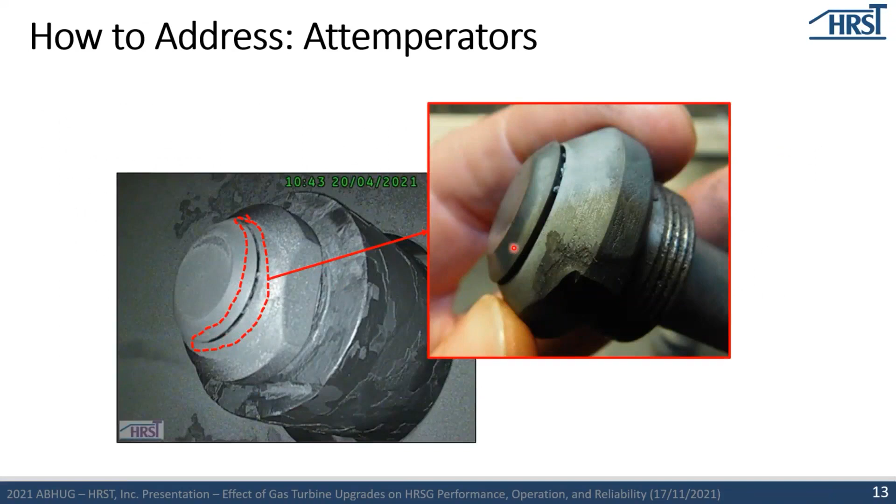This is an example from a recent inspection showing that the spray water probe valve head is actually stuck open due to debris in the system. This was actually leaking water into the system even when there was no spray water demand. If your valve does run out of capacity, you can look at modifying the valve and probe for higher spray water rates, or potentially decreasing the amount of duct firing in your HRSG to lessen that spray water demand if you're duct fired.

Next, we'll look into HRSG rated capacities. Since the gas turbine upgrade is putting higher exhaust energy into the HRSG that it was not originally designed for, it's typical that steam production is going to increase. This could cause the HRSG to exceed its rated steaming capacity, and that higher steam flow rate going into the turbine could also increase the back pressure through the HRSG, causing relief valves to reach their set points, or if they get close, they can chatter and begin to damage the valve.

If you have an HRSG that has duct burners, one of the best ways you can control this is by derating the duct burner and backing off on your firing rate. But if you have an HRSG that does not have duct burners, you're slightly limited. Without duct burners, you really don't have that luxury of being able to modify the heat input into the HRSG, besides altering the gas turbine.

Typically, you don't want to back down the gas turbine. For one, you're going to lose megawatts, and you're going to increase the plant heat rate. But at the same time, as you decrease your exhaust gas flow rate through the gas turbine, it's likely that the temperature is going to increase slightly as well. So you actually run into low load gas turbine situations.

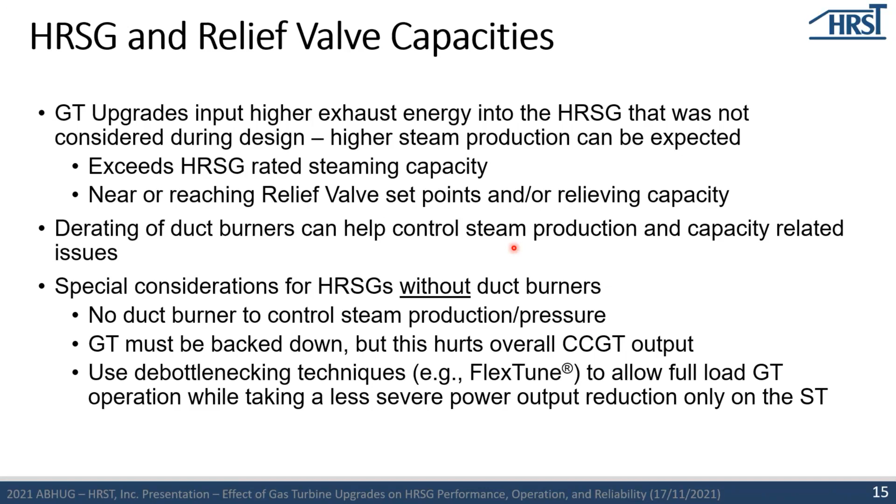There are some debottlenecking techniques that can be used. HRST uses one called FlexTune, where it allows full gas turbine operation and only really sees a limit on the steam turbine by using steam suppression. We'll get into two different case studies next, discussing duct firing and non-duct firing HRSGs.

If your HRSG has a duct burner, typically your exhaust gas temperature is going to increase up to the isotherm conditions, which is around close to 28 degrees Celsius above what the pre-existing upgrade would be. This increases the temperature into the burner inlet. So if you're operating at the existing firing rate, you're likely going to see increased tube metal temperatures downstream of the duct burner. By using a thermal analysis, you can understand that backing off on the duct burners and what your heat input is can help decrease the tube metal temperatures.

Essentially what you do is derate the duct burner by putting in a new limit into the DCS to control what that firing rate or firing temperature is going to be. One very critical thing to do, pre and post upgrade, since your exhaust gas flow is going to change through the HRSG, is to monitor the flame patterns. Understand what they look like prior to the upgrade, then monitor them post upgrade, and ensure that the flame is only roughly 1/2 to 2/3 of the way down the firing duct, so that it's not impinging on the tubes.

So the two case studies we have here is a 7FA that was upgraded with the AGP upgrade to a .04, and these are the same, both triple pressure HRSGs.

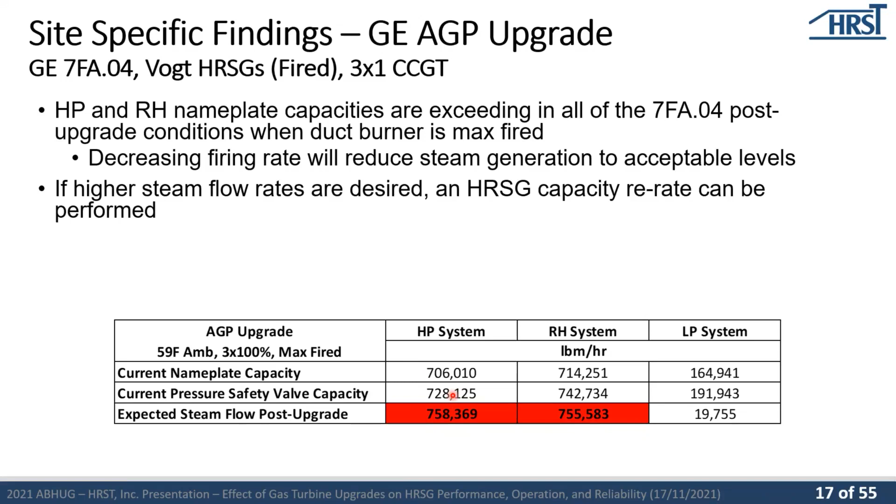One option you have versus backing off on your duct burners is, if you want to maximize the total amount of steam going into the turbine, you can perform an HRSG capacity re-rate, which is essentially more of a paperwork and study process to ensure the system can handle the amount of steam you anticipate generating.

However, let's say your HRSG pressure increases substantially to where you're reaching your PSV set points or even the MAWP of the system. That's a much more complicated issue, because the typical panels, tubes, and pressure parts are designed with very little margin as far as MAWP, so increasing that is typically not an option. So an HRSG steam capacity re-rate is quite doable, and a pressure re-rate is typically not a feasible option.

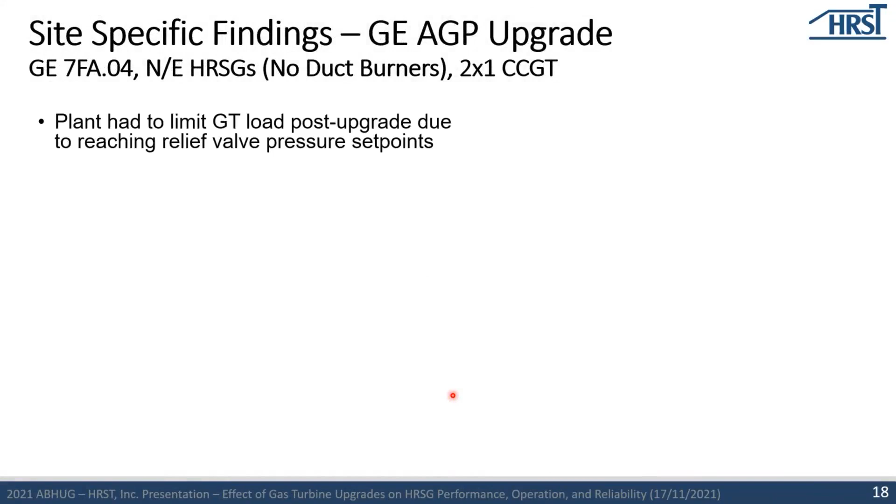Next we'll look at one other case study. This is a 7FA.04 with Nooter Eriksen triple pressure HRSGs. However, this plant does not have a duct burner. This plant performed the upgrade but did not do a pre-upgrade analysis. In their post-upgrade operation, they noted they were limited on the gas turbines and had to decrease output because they were exceeding set point pressures and MAWP during full load operation, during typical summer ambient conditions, and especially during cold ambient conditions when the amount of flow through the HRSG increased.

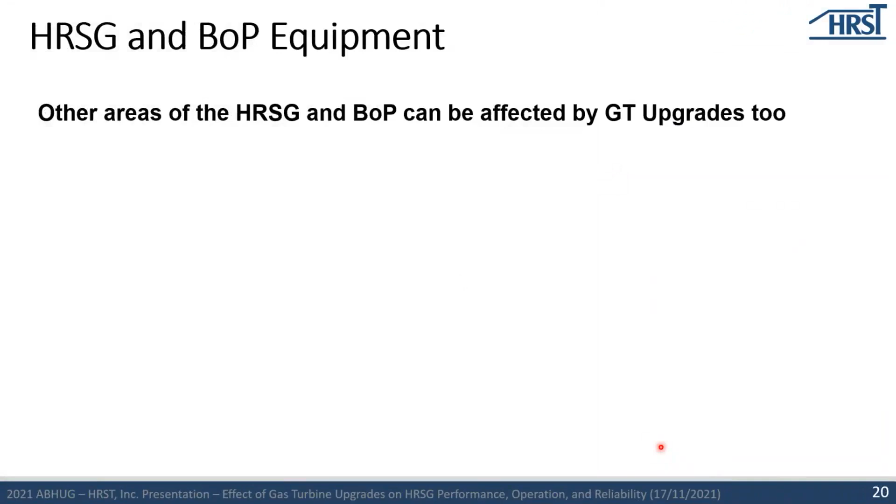Now, outside of the HRSG, there are different types of equipment, balance of plant items, that can be affected by the upgrades. I'm not going to go into complete detail on all of these, but I wanted to highlight some. Non-pressure parts are oftentimes overlooked - this is your liner systems, baffles, tube restraints. If they're not designed for the operating temperature, either in the inlet duct or downstream of the firing duct, you could have high temperature oxidation, thermal expansion, and constraint issues that could cause these non-pressure parts to fail. This can also lead to pressure part issues downstream, since the tubes are not constrained as they were initially designed.

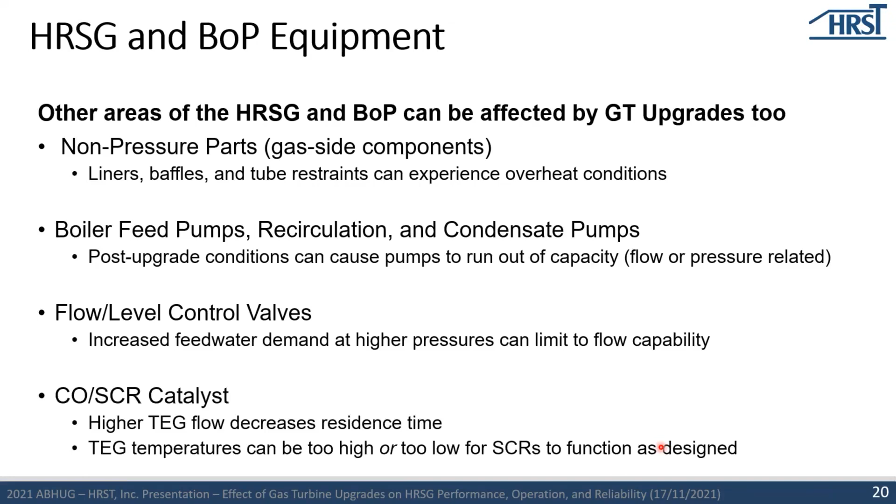Some of the balance of plant items where we typically see issues are the boiler feed pump capacity for the IP and HP systems, and low pressure feed water heater recirculation pump and condensate pump issues. Typically what you see here is the post-upgrade conditions cause the pump to run out of its capacity, but it's also possible there could be a pressure-related issue where they're not able to meet the economizer inlet demand pressure. Some other BOP items are flow level control valves - it's possible they could exceed their flowing demand. And then with the emission control system, CO and SCR catalysts, the higher temperature may not allow the SCR to function as designed, and the increased turbine exhaust gas flow rate decreases the residence time for the catalysts to be effective.

So a couple ways that you can prepare your facility for a gas turbine upgrade is to have a thermal modeling analysis performed prior to the upgrade being installed. This models all of the heating surfaces section by section, so you can look at each individual tube row.

Using the gas turbine post-upgrade data, this will allow you to predict how the HRSG is going to operate, and the results will help you understand the changes in HRSG performance, your capacity and limitations for the HRSG or balance of plant, and select operating limits and boundaries to help protect the HRSG. So the thermal modeling can be used for upgrading equipment and design modifications as well.

Let's say you understand that you need new pressure parts installed. This is one way that you can assess how those pressure parts are going to be, or if they're going to be designed to the correct standards.

So in closing, gas turbine upgrades are being pushed heavily, and they're definitely important in today's market for improving flexibility and being competitive. But it's important to understand that the HRSG and the balance of plant could have limitations before implementing the upgrade. So it's important to look at these ahead of time.

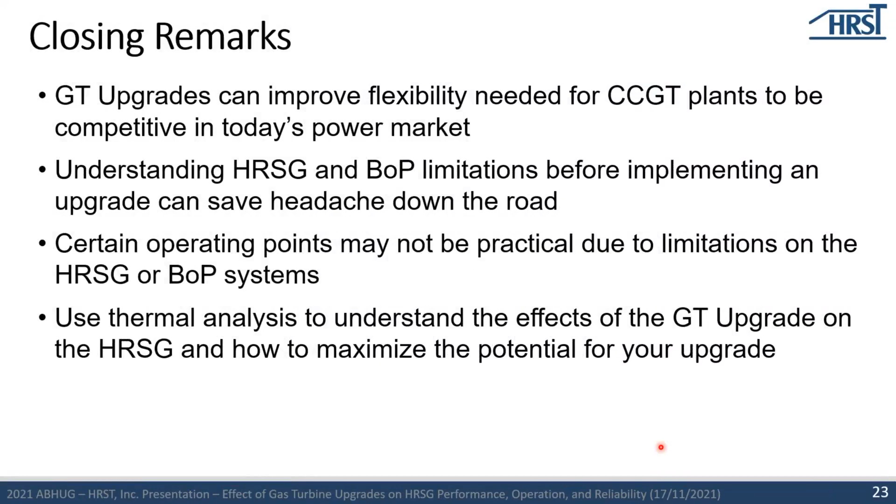I think I've used up all of my time, so if there are any questions.

Yeah, Evan, thank you. You went just a little bit over, so if it's okay with you and you're going to stay till the end, we'll take a couple of questions at the end of the session. Is that okay with you? Absolutely, that works for me. Okay, thanks. Because Kirk had to disappear, so we'll come back to you at the end. There's a couple of questions here.

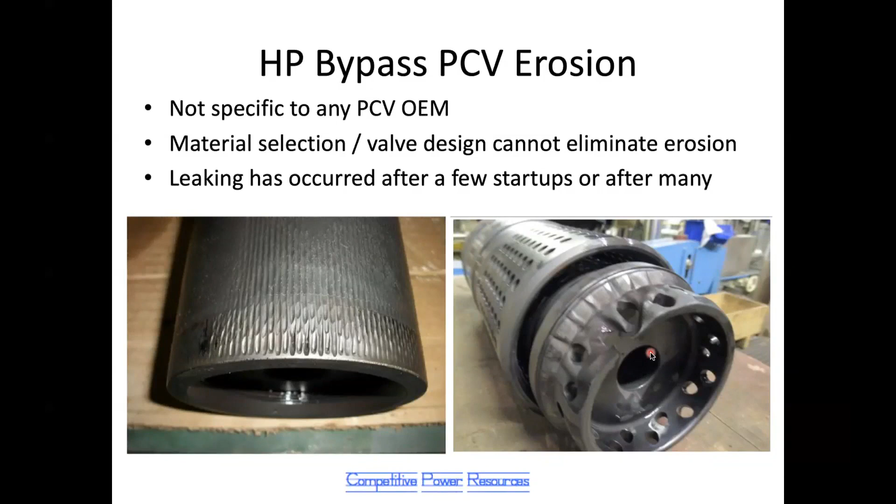So where does this water come from? One source that the root cause assessments have identified in some units is, as we all know, when you start the unit, a considerable amount of condensate forms in the HP superheater. If you don't drain that water out completely before you open the bypass valve, that water is going to be sucked up and pass through the bypass valve. During hot layup, if you're using the bypass to reduce pressure for forced cooling, eventually the superheater outlet temperature gets down to saturation because you're not putting any heat in the boiler, and you start pulling water through the bypass. We'll look at some data that shows those things here in a little while.

Interstage attemperators and final stage attemperators are notorious for leaking. As we've probably mentioned before, Barry and I have done many surveys of plants, and when I look at the thermal transients in the plant, I very often find leaking attemperators, spray valves, block valves, control valves. So that's a very common problem that's very important to fix.

But if your attemperator is leaking—that's another way to put interstage attemperator—the water will accumulate in the superheater or the reheater, and when the bypass valve's open, it's sucked through. The final attemperator leaks, it's got a direct path through the main steam pipe to the bypass valve. I've seen some cases where there are permanent distortions in the steam pipes that create a low point that's not possible to drain. So water accumulated in those undrained low points will be swept into the bypass valve if they occur upstream. Those things are pretty straightforward, and if you've got them, you need to find them and fix them.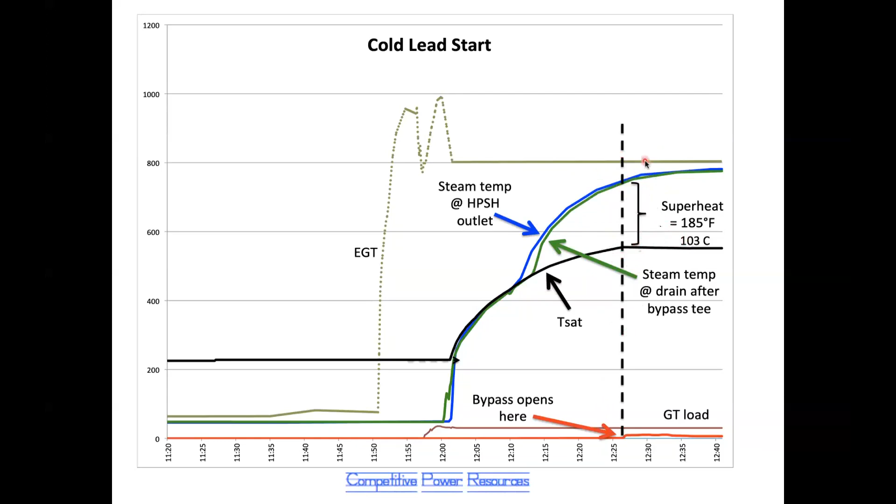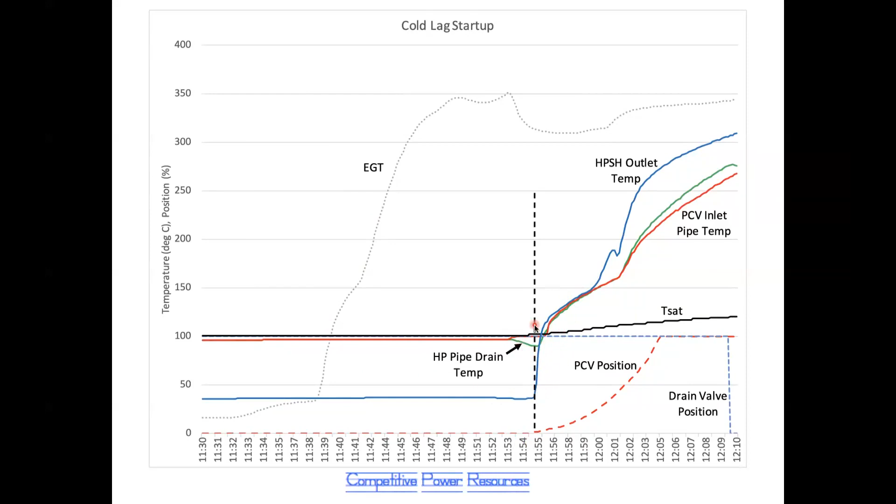The other problem with this startup is that the bypass valve opens, when it opens here, things start warming up, but like before, it's too late. The superheater outlet is subcooled and starts warming, so it's going to be pulling water along, and the downstream temperature is also below. So this is another case of water passing through, and it demonstrates that this valve, this pipe, is just not large enough to move enough steam to warm this deadheaded section of HP pipe.

So some simple stuff. Ensure that your HP superheater is drained during startup before you initiate steam flow. You want to do that for the superheater's benefit as well, but it's equally important to the bypass valve.

You want to make sure your attemperators don't leak. That's for the benefit of the attemperator steam piping and the bypass.

You'll need to review some DCS data looking at these upstream and downstream thermocouples on your HP steam pipe to determine when you have superheat and when it is safe to open the bypass.

In some cases, it may require adding some additional thermocouples to look at pipe temperature locations that aren't in your normal instrumentation. Now, if you add thermocouples like that, I'm not suggesting you add a thermowell into the pipe. I'm suggesting that you spot weld just thermocouple wire, much like the post-weld heat treat people do, onto the outside surface of the pipe.

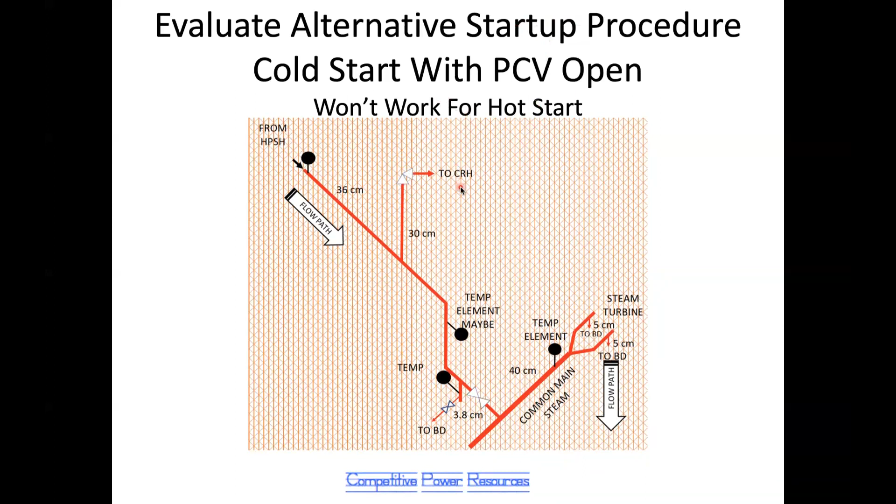I think a solution, there are hundreds of 2x1, 3x1, 4x1 plants in the world that have this piping arrangement where you've got only a small drain in front of the isolation valve to the common header, and you have no means of establishing enough of a flow path to warm this deadheaded pipe without opening the bypass valve. So I'm suggesting here that plants that have this arrangement and are having erosion problems with the HP bypass, your solution may be to install a larger drain at this location so that you can get something like the steam flow to warm this section of pipe that is produced when you're doing it with these drains down here in the lead start. So that's my pitch with 2.5 minutes to spare, Barry.

For more than 20 years, we've been delivering unique solutions with a diverse range of services to all major coal-fired power stations, some 50% of the total megawatt capacity. Of particular note is the supply of super high quality chemicals as an essential component in boiler treatment. As you are aware, this can often be a sneaky source of impurity ingress if you get it wrong. Also, the specific skills in sampling and trace analysis of contaminants, including corrosion product monitoring to industry standard guidelines, is critical.

Earlier this year, we were acquired by MAK Water. It was a strategic step, allowing us to expand our capabilities into DMIN and RO. As you know, lots of things happen at power stations. Experienced feet on the ground can make all the difference when it comes to ensuring a smooth operation, site-specific solutions, and identifying the source of those strange idiosyncrasies that emerge from time to time. I'm sure you may know what I'm talking about. We've helped some others address these types of challenges. Thank you.

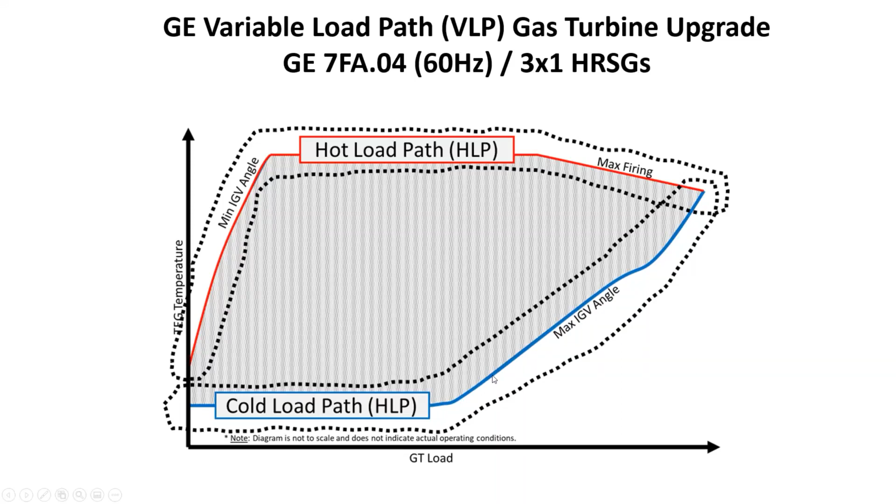It definitely has some effects. This example shows the difference between attemperator spray water capacities along the hot load path versus the cold load path. If you look at them side by side, the hot load path causes the HP attemperator to reach its capacity very rapidly, while along the cold load path, the gas turbine load reaches 90% before any spray water flow is required. If you imagine some intermediate path, you might have a higher degree of attemperator spray water flow rates reaching capacity. However, if you're following this cold load path most of the way up to base load conditions, it's quite possible you'll see lower spray water flow rates than typical operation.

Good. Are there other side effects or drawbacks, like environmental or emission-based issues? Yeah, there are. I have a presentation I could share with you after the fact, where the difference between the hot and cold load path changes where heat absorption of the HRSG is primarily occurring. The cold load path shifts a lot of heat absorption to the IP and LP system, which causes more issues with capacity and pressure there, whereas it doesn't affect the HP system as much. The hot load path is similar to a gas turbine low load instance, with low exhaust gas flow rates but very high temperatures.